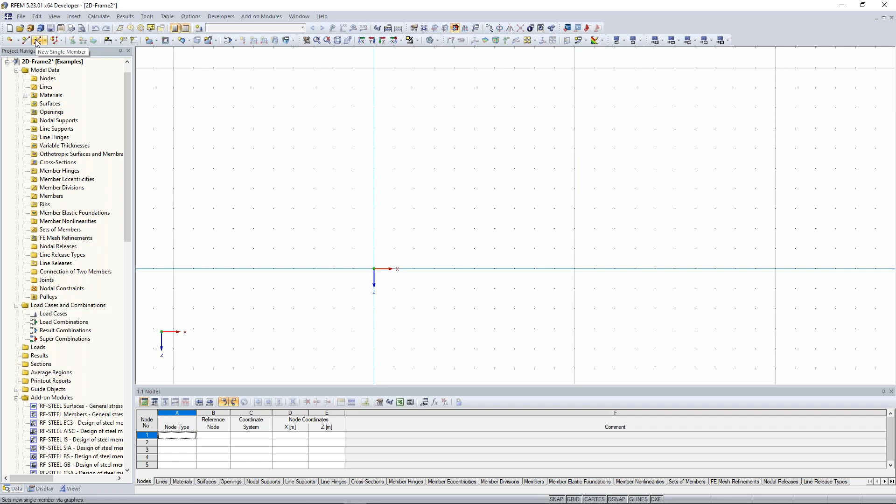First of all, I create my column. To create columns, you have to insert members, so I click here in the symbol bar, new single member. Because we haven't modeled or created a member yet, we have to create one. So I click here, create new cross-section for member start.

It's useful to use this most commonly used cross-section here in this window, and we have to choose the HEA profile. So in this case, this one. We click on that and choose here HEA profile 180. Yeah, we choose the right material - in this case, not S355, we want to have this as 235.

So I have to modify this material. The best way to do that, I think, is to modify it, because then it's modified and we can use it the whole time. So click here, edit material, open here the material library. Choose here Steel S 235. It doesn't have to be in the standard group German, it can also be in the Eurocode group - it has the same values, the same material properties, so it doesn't make a difference. So choose here Steel S 235.

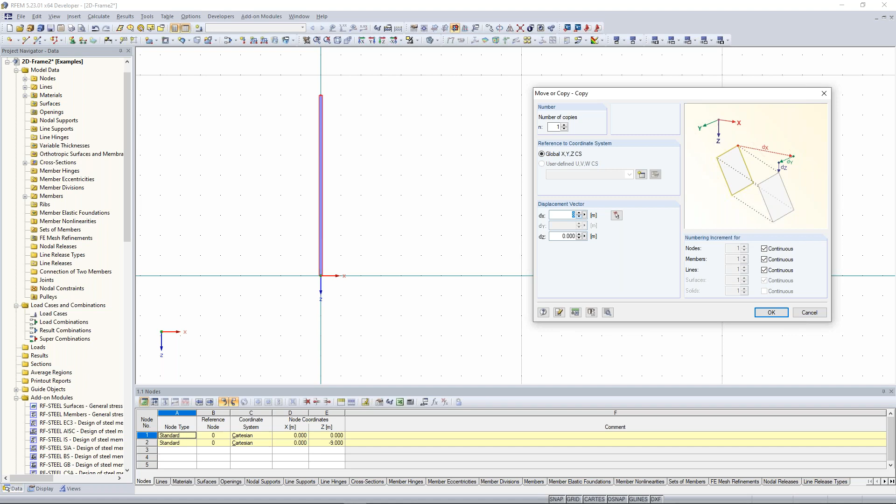Then right click, and now I want to show you the copy function. So I select this column here, right click, say move and copy, and set the number of copies to at least more than 1 in order to copy that. My displacement vector is 9 meters - no sorry, 8 meters, sorry, now it's right. Okay, now I have 2 columns here.

Now the next thing is to create the upper girder, the roof girder or roof beam. For that, I choose again new single member, and I create again a new profile, clicking here, creating new cross-section. For that we need an IPE 270 profile, so again here we have these IPE profiles.

If you don't find the wished profile here, just open the cross-section library, for example here, and RFEM offers you a lot of different cross-sections. When you want to find the I-profile, click here - the I sections, click here on rolled and so on. I can do it this way, but also the other way. Now I'm at this window, go here for IPE, and click here the IPE 270. If you want to see the different cross-section properties, the values, click here on the info button below cross-section, and now you see a lot of cross-section properties - shear area, cross-sectional area, moment of inertia, and so on.

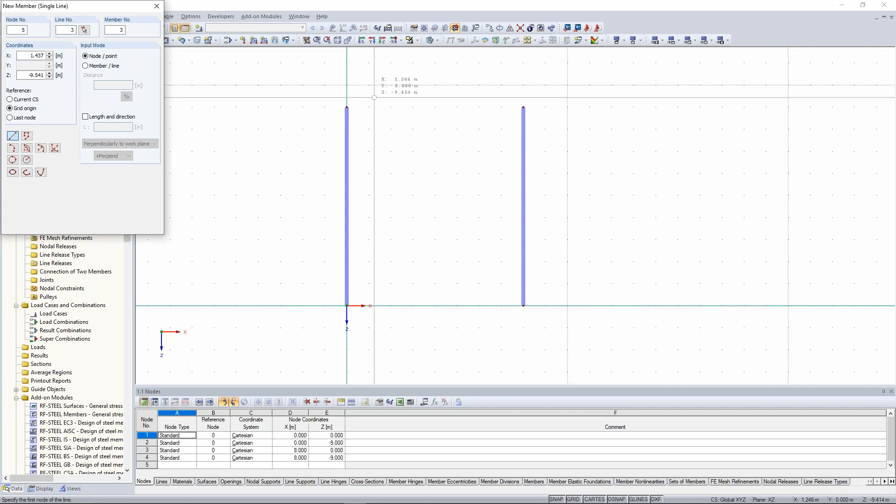Now, the next point is creating the slab beam here. We have also a slab beam or slab girder, with another profile. First of all, I want to create this cross section.

I told you in the first online training that we have also the possibility to create cross-section members and model data with the help of the data navigator, but also with the help of the tables.

Now I want to create the new cross-section with the help of the data navigator. So first of all, I choose the data navigator, go to the area of cross-section, open this tree there, and with a right click on cross-section, I say okay, new cross-section please.

And there I create a new cross-section. In this case, again, an IPE profile, but IPE 360. Okay, click on OK, click again on OK.

And now you see a new cross-section was added to the cross-section list, and it's blue. It has the color blue. What does it mean? When you have some model data here, especially which are blue, this means that they aren't used in the model right now.

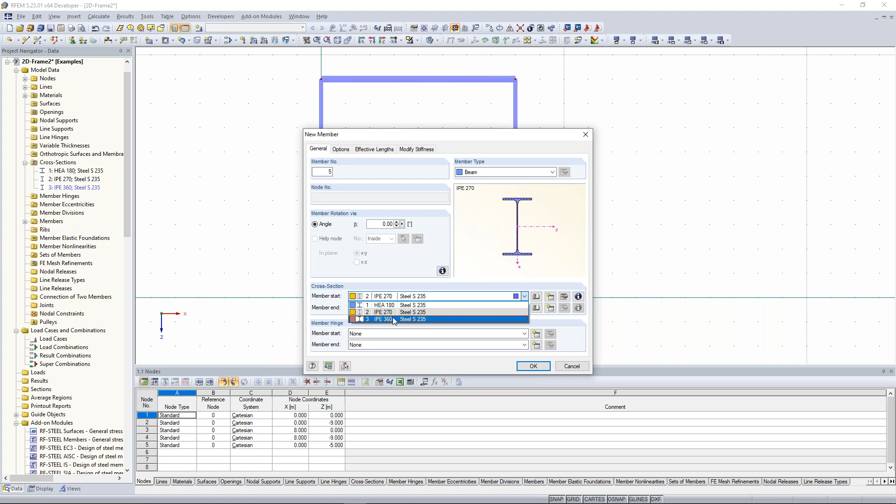I get here a new node. Now I can easily create a new single member, again by clicking here at the symbol bar, new single member, and choose now the right cross-section I've created before. Click here IPE 360 and create that from that side to the other side. Good.

Now we want to create again here a column. And for that, I divide this member again. Click here, member number 5, and say divide member. But at that time, we do it graphically. Big advantage at the graphically dividing is that you can not divide just this member we clicked before, but also any other member. This is one advantage of dividing members graphically.

Important thing is to choose the right steps, the delta steps. And now I go to this member here. It refers also to the member orientation. And here it's important that we divide this at the length of 4.5 meters.

So close this window. We have here this newly created node, and now we have here the same cross-section column. So I click here on that cross-section, on that column, and now I want to copy it by drag and drop.

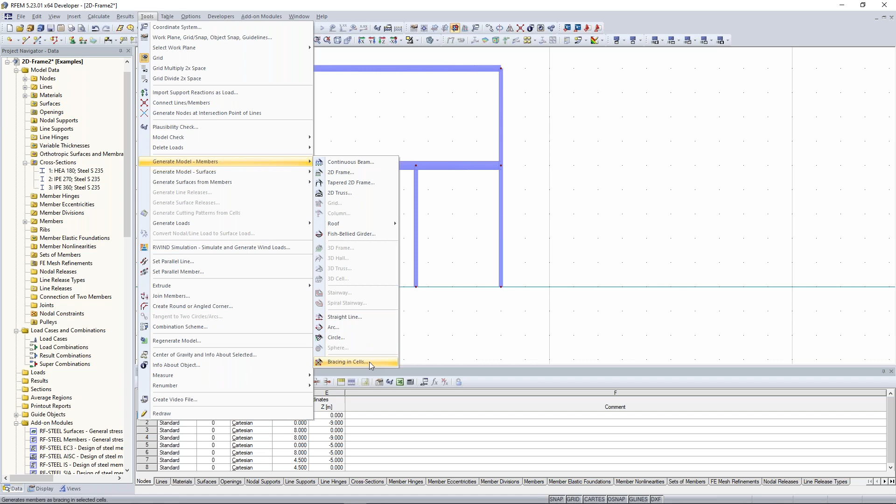But I decide to create a bracing in cells. I click on that. Now, first of all, the bracing normally reacts just on tension. So if this member gets tension forces, it will react and transfer also the loads. But if the member gets compression forces, it will fail and this member wouldn't be calculated, okay? And wouldn't have any impact on the structure.

So it's important to choose here the right member type, tension, and now also the right cross-section. I create a new cross-section. We have a round steel here. Click on that, round steel.

And choose the right diameter, 20 millimeters. Click on OK. Click again, OK, and now we have the right cross-section.

Now we want to create this cell, but normally you would see a cross there. The reason we don't see a cross is because this rectangular cell isn't closed by a member. So we can create virtual lines. I click here on virtual line, then click OK, and now you see the cross because we closed this cell. Now we click here, select cells, and I choose this cell. Click on OK, and the bracing is generated.

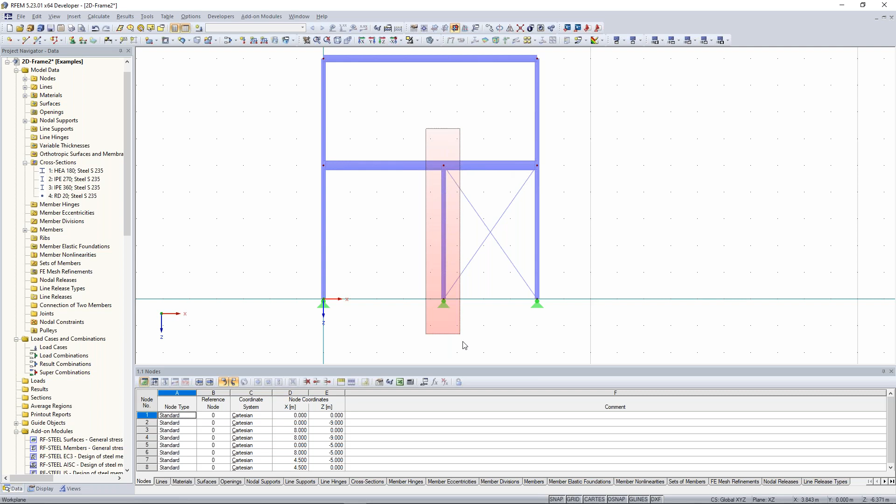And finally, we have to do our hinges, because here I want a hinged joint, and the same way here also a hinged joint, and that column should be also hinged. So I have to create hinges, and for creating hinges I refer also to my data navigator.

So I go again to the data navigator and say okay, member hinges. I click here with the right click, member hinges, and say new member hinge. Now this window opens, and let me explain what you have to do there.

If you want to create a moment hinge, so no moments will be transferred to the other member, you have to activate φY here, so the hinge. If you want to create shear hinges or normal force hinges, you have to activate the displacements here, UX and UZ.

So for that, we want to create a moment hinge, we have to activate φY here. You can also do it by clicking one of these shortcuts or icons, set rotational release MY, and it has the same impact. For that I choose φY, click on OK.

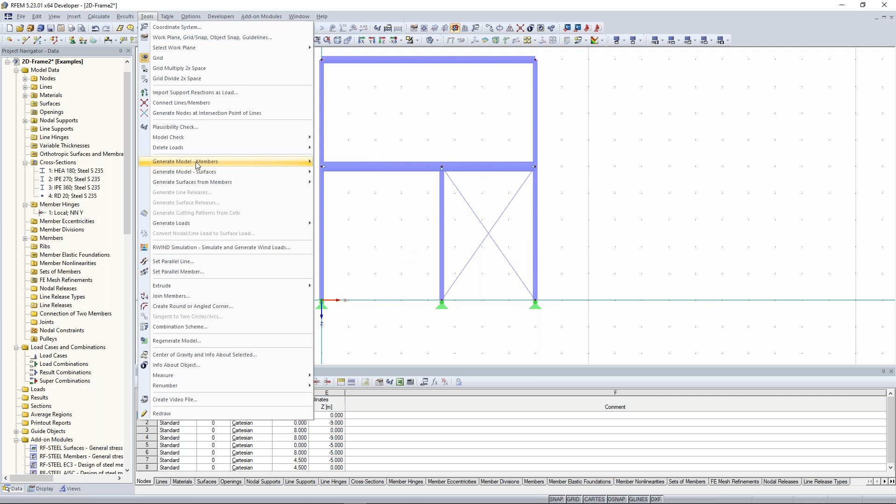I create the bracing again on the left side on that cell. So first of all, go here to Tools in the menu bar and say Generate Model Members. And at the bottom you find bracing in cells.

And the reason maybe why you couldn't create this is because you didn't set the virtual line here. So you see now where the crosses are, the group crosses. There it's possible to create a bracing.

But here on the left bottom cell, you don't see the cross, and this is also the reason why we couldn't create a cell there. In order to do that, we have to create a virtual line in order to close this rectangular by members, in order to get a cell.

I do it now as an example. So I click here, select virtual line. In order to close that, I click here from that node to that node, and then from that node to that node, I click OK.

And now the program sees, okay, this cell is closed, and I can create a bracing here because now I have a cross there. Now, the next thing is you have to select this cell, click here on the cross or the cell, and click on OK. And now the bracing was created.

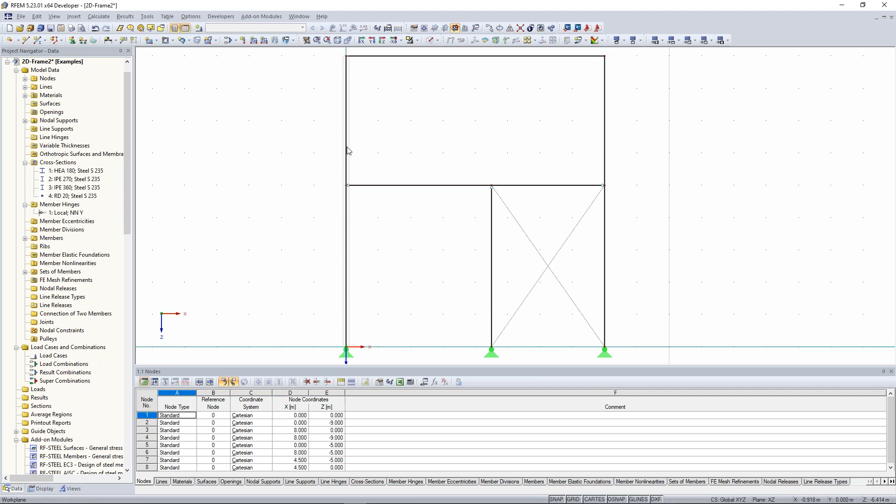Okay, so next point is the loading. So you add now some loads. In order to do that, we have to create a load case before. Click here on new load case at the symbol bar, and enter a name there. It's up to you; in my case, I choose self-weight. I activate the self-weight, click on OK.

Now I add some loads. Because we are using a frame structure and we have just members here, we have to use member loads, not line loads. Line loads please use at surfaces, so lines of surfaces or edges. And when you have frame structures, please use member loads.

I create now a new member load, and I refer to the projected member length. This is similar to the snow load when you have an inclined member, for example. But in this case it wouldn't make any difference because this line or member is straight. So there will be no difference whether you use the projected member length or the true member length. I choose here this one and enter a value of 12.767 kilonewton per meter. Click on OK, and I choose this girder here.

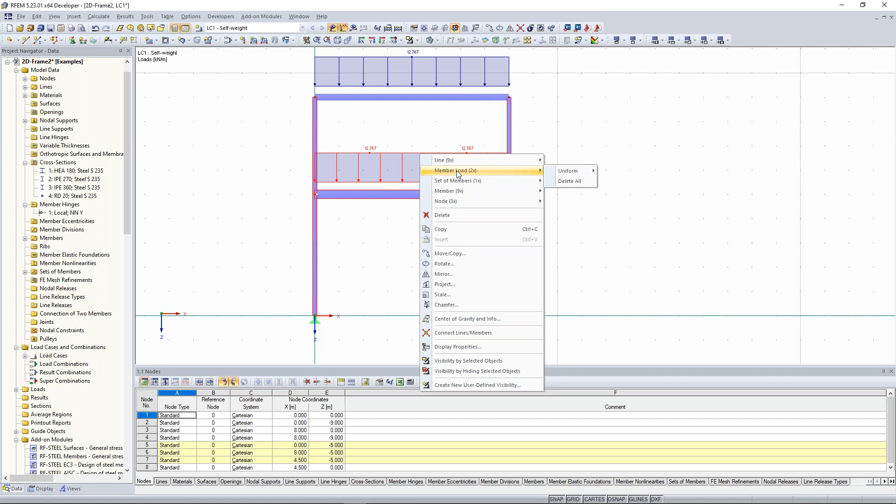Now I do the same for the slab beam here. Click again on these two members here, but they have the wrong value. So what can I do? I select this like that, and now you see I have selected not only these columns but also these bracings, nodes, and so on. But that makes no difference for us, because when I right click, I see the different selection options. This is one big advantage of RFEM, that you can choose these model data or load data and edit them. So in that case, I choose these member loads, uniform, and say edit.

And I change the value, so the load parameter, from 12 to 68.371. I click on OK, and you see I just changed this member load and nothing else.

Now I want to add some nodal forces. For that, I select these nodal forces at the top and say, okay, new nodal load. Because we selected these nodes before, you see here I have these nodes. Okay, I choose here a value of 40 kilonewton in the vertical direction, so I choose PZ, click on OK.

Now I can easily copy that nodal force also to the other floor, or to the other level. So I click, for example, here at that node, and by copying via drag and drop, I can easily copy that very fast. So there are several options to insert these nodal forces, nodal loads.

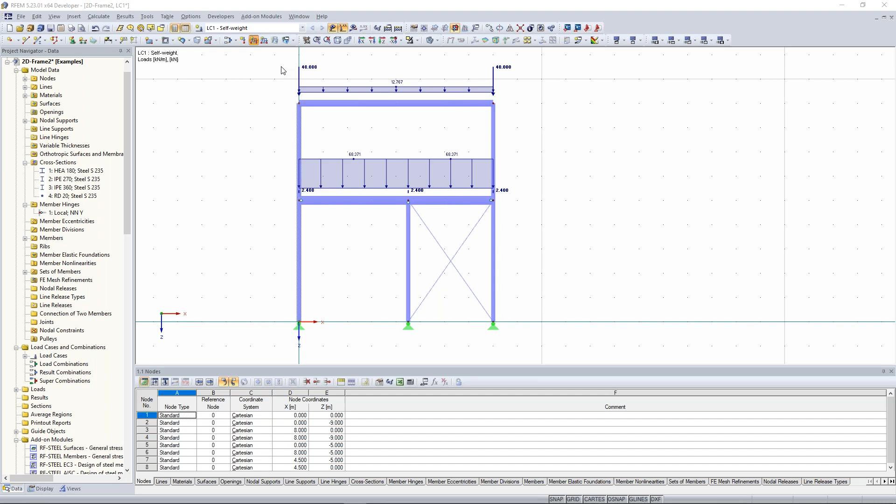And first I want to create this on the right side. So I refer to my members, choose here load parameter 2.7, and now also the right direction, in this case to the global X direction. Click on OK. And I choose here every member manually.

You can imagine if I have more members, it will be a lot of work. But if I use the set of members, it will be an easier workflow adding this load because we are much faster. Click here, sets of members, change the value to 4.32. Now, just by clicking one of this set of members, I created the whole load along this column. This is very helpful and useful because the set of members offers you more advantages, like adding loads, also when you design something.

And now we can also see this in the interpretation of internal forces, or in the view of internal forces. Okay, now we added everything and we can calculate it. So you can click here, calculate all, or click here, show results.

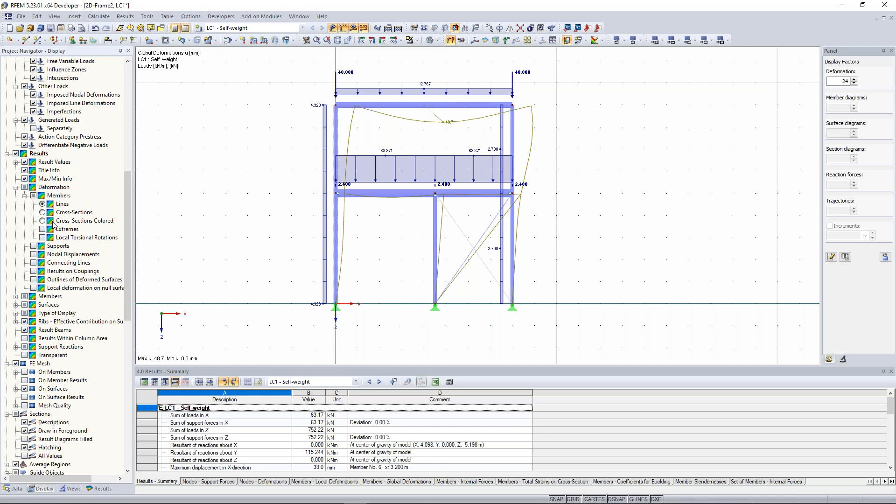And first of all, we see here the deformation. If we want to display the deformation a little bit in a nicer way, go to the display navigator, go down to results, and to the area of deformation, members, and choose that the cross section should have a colored deformation, and you see it like here. You can deactivate maybe also the isobands, the separation lines, and now it would look a little bit nicer. Yeah, this is one tip.

One of my secrets in order to show that a little bit nicer. And then let's go to the internal forces. So for that, we have to activate the members here. Okay, what I want to show you first is the bending moments. I think that's pretty clear because there we have a hinged joint, so there shouldn't be any bending moment.

When we look at the normal forces, I think that's also pretty clear in the columns that we have some normal forces. And now look at the bracing here. Why don't we see any normal force at this bracing, at this member?

Because when we look back to the deformation, we see, okay, this deformation is set to the global X direction, so we have horizontal deformation. This bracing, this member, becomes longer. So I think that's pretty clear that this will get tension forces, and this member will get compression forces because it becomes shorter.

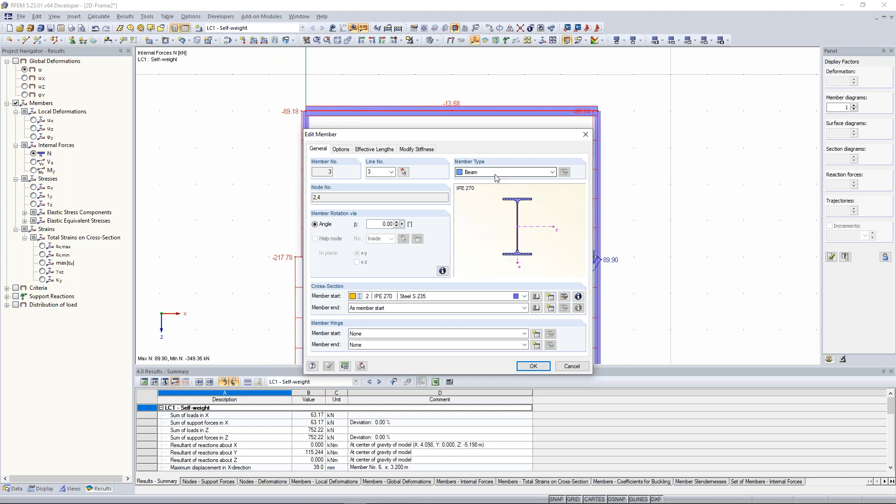Okay, now again, one important point is the connections of the member type. So if I double click on one of the members, we have here different member types. This member type, beam, is the standard member type for creating these structures. This is a type where you can transfer all internal forces, so you have normal forces, shear forces, and also bending moments. So it's a bending resistant beam.

When you have trusses, for example, a truss is a beam, and at that beam you have hinges at both ends. So at the ends of this truss, you wouldn't have any bending moments. And the same with tension and compression member types and so on. You have a big choice of these member types, but the most important are the beam, truss, and also tension and compression. Okay, good. Later we'll come back also to the ribs, but that's another story.

Okay, good. And now I want to show you also the view of the internal forces at a set of members, because this is also more advantageous to do. So I deactivate that, I change to my wireframe model.

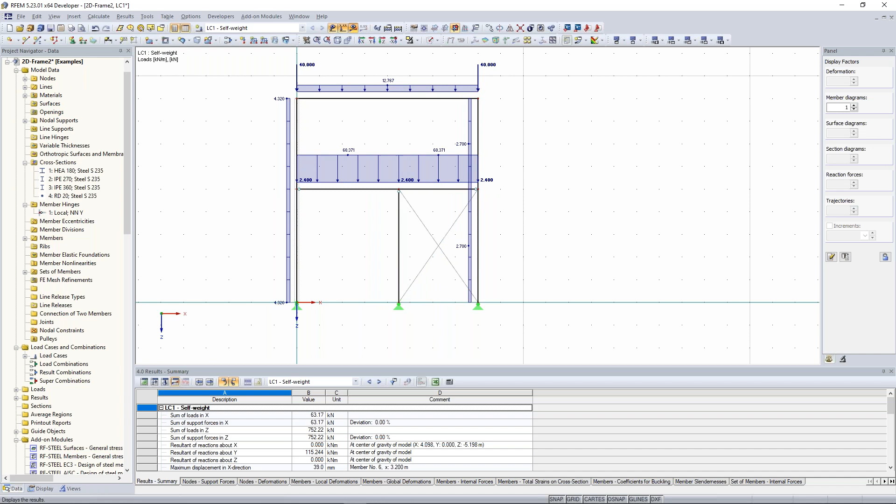Okay, I can show you the difference. First of all, I show you with the help of the cables. I think that's the best way to do that.

So look, the bracing has the member type tension, but you have also the possibility to have truss and truss only normal forces. A truss can have along his member bending moments, but only at the end there are no bending moments.

So when you look, I create here a rigid joint, so I delete this member end, but I create here a single beam with hinge joints. So in order to create that, I create here at the member end again a hinge, and now it's a single beam. You have no bending moments there. You will see it now, just for this member.

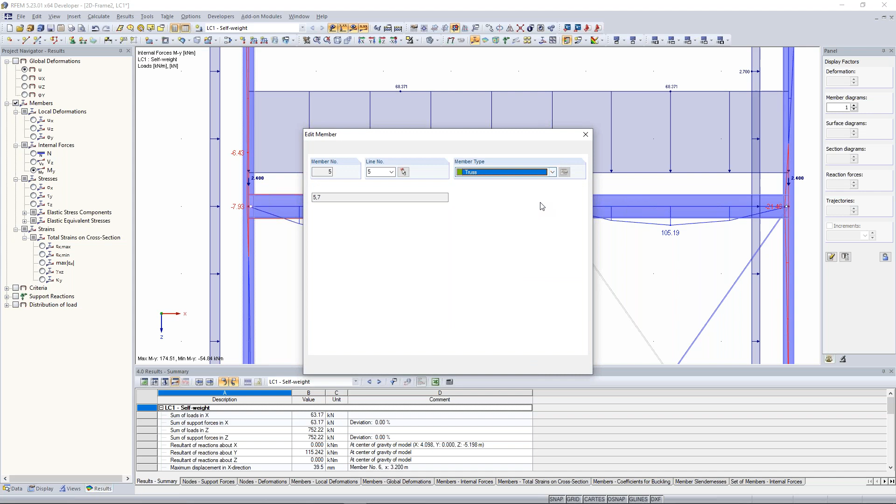Look to the bending moments, and I think that field moment is very clear. At both ends we have hinges, and that's also the reason why we get no negative bending moments. And the same situation you can create also with the member type truss. With the member type truss, the adding of member hinges is blocked, because at both ends you have hinges. Now look to the internal forces of the bending moments. Same situation, same effect, I think that's also clear.

And now I want to show you with the truss. So for that, I choose here these two bracings, say edit, and truss only normal forces.

Now I think the better way to show you is when I activate this at the columns. Look to the bending moments, and when you look to the columns, you see there are some bending moments. And when you don't want to have that, when you want to just transfer normal forces, only normal forces, click on that member, on that column, and set truss only normal forces.

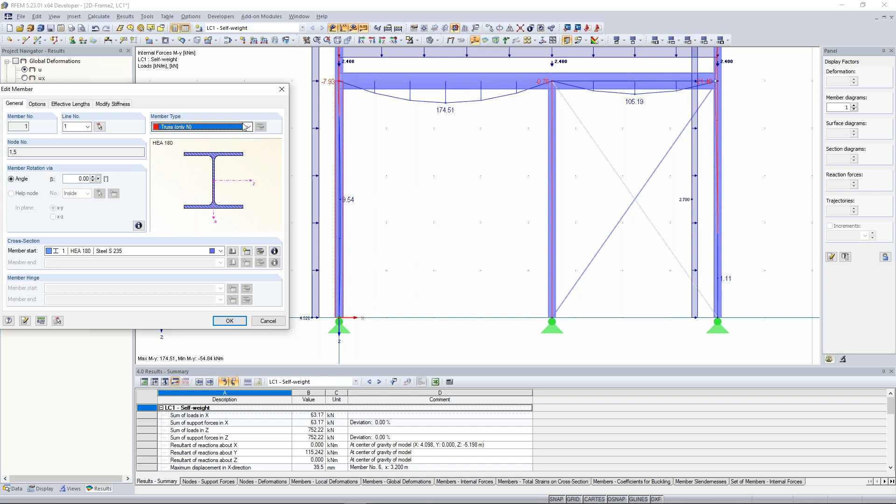So the program will calculate that column so it will get just normal forces. But these forces can be positive and negative, so you can get compression or tension forces, but nothing else, just normal forces, positive or negative. I calculate it, and you see no bending moments. At the calculation before we had some bending moments, but now there are none, just or only normal forces. And this is a difference concerning these member types.

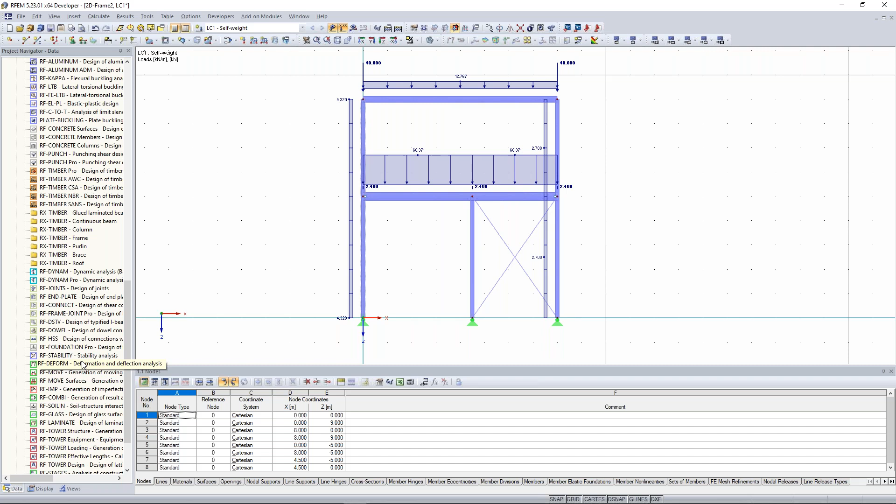So for that, I click here at RF-Stability. I consider 4 eigenvalues, so 4 buckling cases. I refer to my self-weight load case. I just have to activate my division for straight members at least at 10, so the minimum number of member divisions should be 10. It's up to you, but more than 2 definitely. And the other settings, you can leave as they are. Calculate it.

And now you see the critical load factors, the factor where you have to multiply the whole forces, the whole loading, in order to get an instability. But we want to show the eigenvectors, and here we see it.

Normally the first eigenvector should be there, but I can say why this eigenvector is like that: because there isn't a column, this is a rigid joint here since we have no hinge. I change this now, I make here a hinge, and now keep that eigenvector as first buckling case in mind. I create here, wait a moment, here a hinge, and calculate everything again.

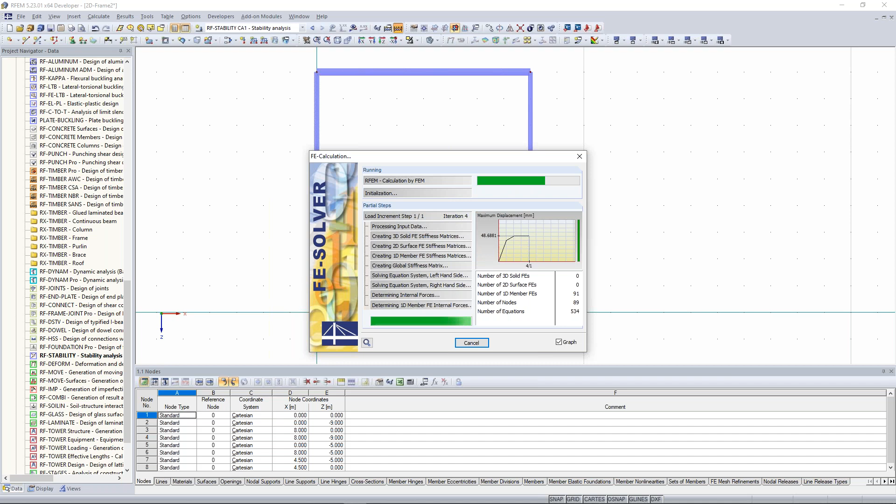And now it's better. So the first buckling case here is this column. We have here the second Euler case. And this is a local buckling case or a local failing, because this column will fail at the eigenvector, or critical load factor, of 5.81. And then the second will be a global failing.

And to look at the buckling lengths, or critical lengths, effective lengths, click here. And here you see the critical lengths of this.

When we look to the member number 8, there should we have a member length of the same length like this one. Look here, member number 8. We have here for the first eigenvector the effective length factor 1, and this is also similar to the Euler case 2, and this length will multiply by the normal length here, and we get a value of 5.7 meters. This is the effective length, so the buckling length.

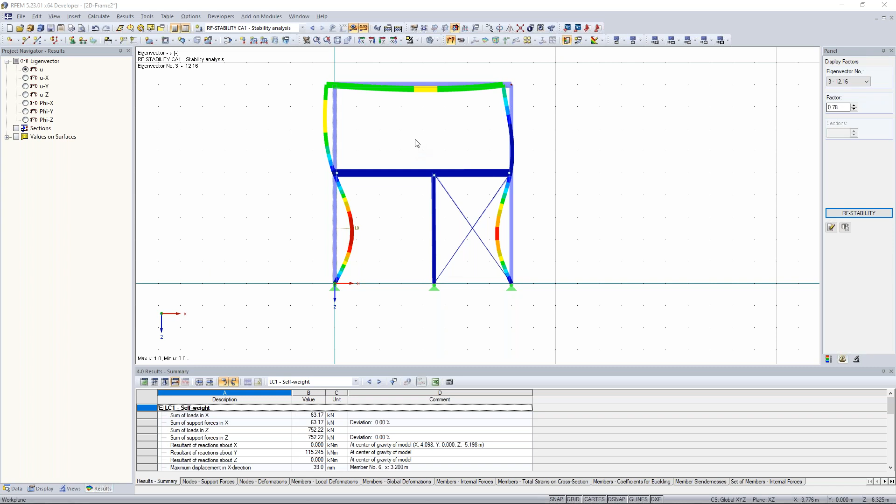So as far as I understand, this question is about the design practically. I think so too. So you want to prove if this cross-section is enough for the whole loading.

In order to do that, you have to do some designs, and we can do a simple design, for example. We make a very easy design, a stress design at that beam. Look at the results, the bending moments. So we have here the normal forces, this bending moment, and so on. Now look to that.

We make a very easy design. For that, you have to use one of our add-on modules, and there you can refer to several design options. For example, when you want to design it according to the Eurocode, please use this RF Steel Eurocode 3. When you are from somewhere else and use different standards, please refer to the wished standard here.

But for that, I make a very linear elastic proof. So I go here, RF Steel Members. This is a general stress analysis of steel members. I refer to that member here, click on OK, choose this load case here. Now I can check the right material and the cross section.

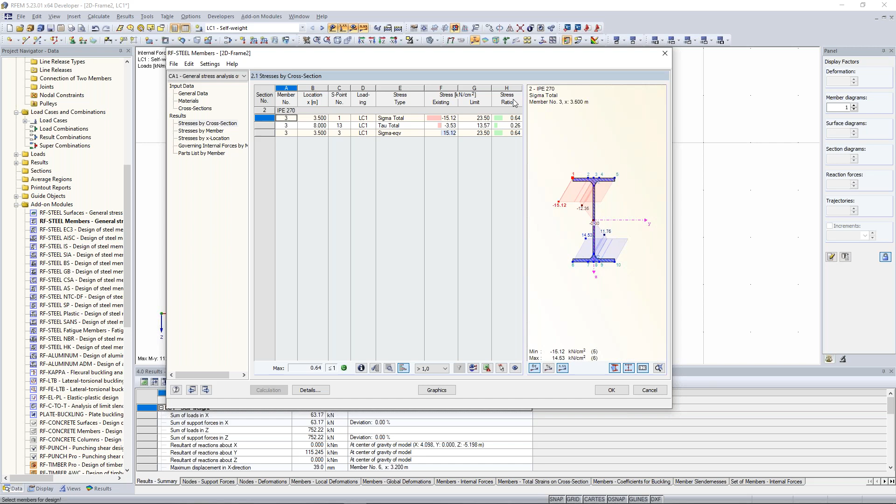And here you have the possibility, after the calculation, also to optimize the cross section. I have here this cross section IPE 270. I calculate it, and you will see the stress ratio is okay. So we have a value here of 0.64, and that's okay. So I can go back, say the maximum design ratio is 0.64, and I can optimize it.

So the cross section will be optimized, therefore the optimal section from the table will be used. So we can get a smaller IPE profile. Click again on calculation. Now we have another stress ratio, much more than before, because it refers to the optimized cross section, and in this case it's the IPE 240 profile.

And this is maybe a way to optimize or to get the right cross section for that case. Okay.

Another question, maybe the last question of this chapter: What are null members? Null elements, sorry, null elements. These null elements are members without any rigidity, so without any stiffness.

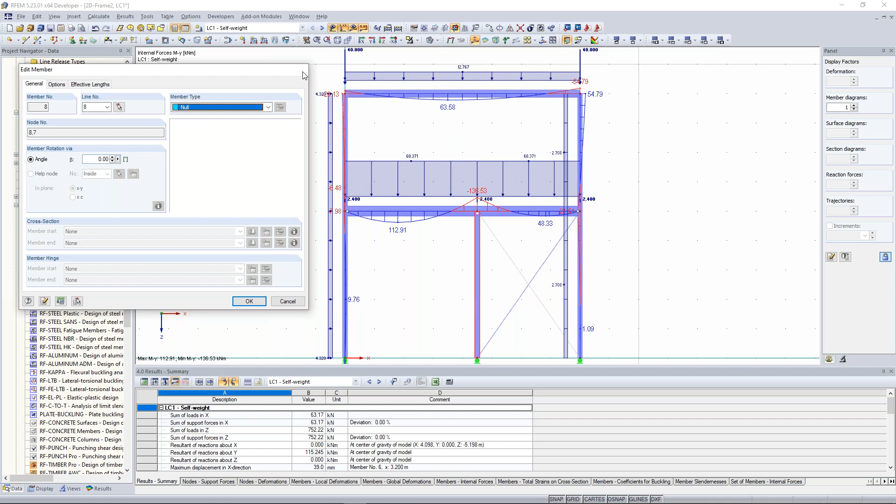So for example, I can create here this null type here. This beam will look like that. And then I would, for example, have a closed cell. This is maybe one option. Or when you want to add a surface load on members and you want to cover the whole rectangle, you can use these null members.

So the null members are maybe one way to model something, but you don't want to have any impact on the structure. So these member types don't have any stiffness and so on, just for easier modeling.

Okay, fine. Thank you. So I prepared some questions for you that will cover this chapter. For that, first of all, this question.

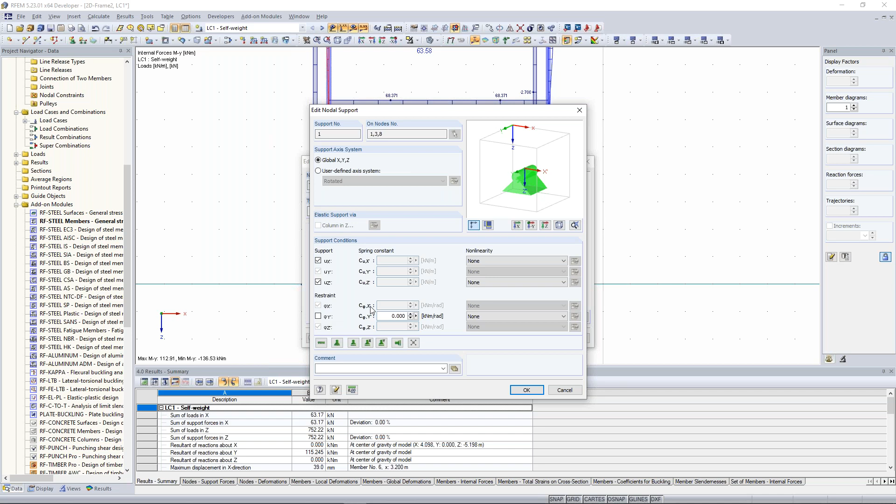I can show it here again. So I click here on one of these supports. When I added this type of nodal support, you see here some displacement and some resistance. So here the supports and the restraints are greyed out, and that's because we are using this 2D system, and some deformations and rotations are partially blocked. Good.

So the last question of this chapter is this one.

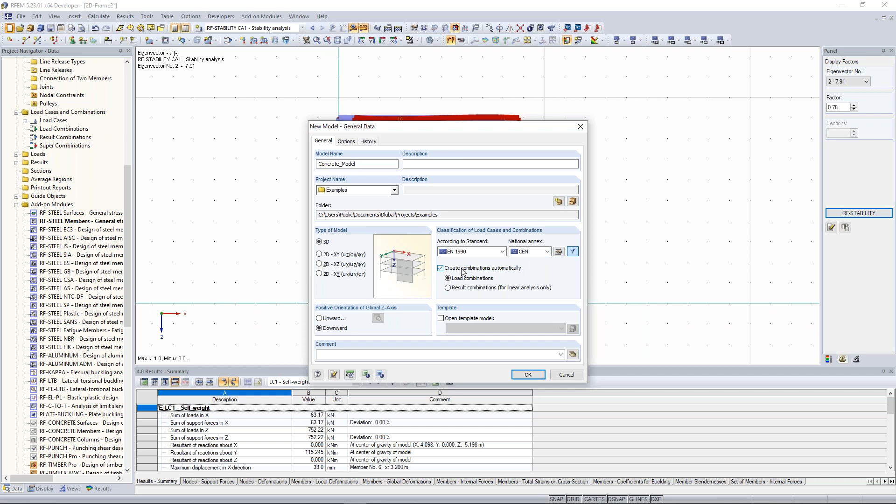My z-axis is oriented downwards, and now it's very important that we choose here the Eurocode and select the right national annex. For that, it's okay when we have here the CEN, the Central Europe, and create the combinations automatically. We click on OK. And a new window will open.

In order to insert the nodes very easily, I would recommend you now to use the tables, okay? So I jump back to the view in the Z direction in order to have my window like that.

And now I insert several nodes via the tables. It's very easy when you have the coordinates in order to do that. Just click here at nodes, click on one cell, refer to the origin point, then jump from one cell to the other with the tab key on your keyboard, and enter here for X for the first node: 0, 0, 0.

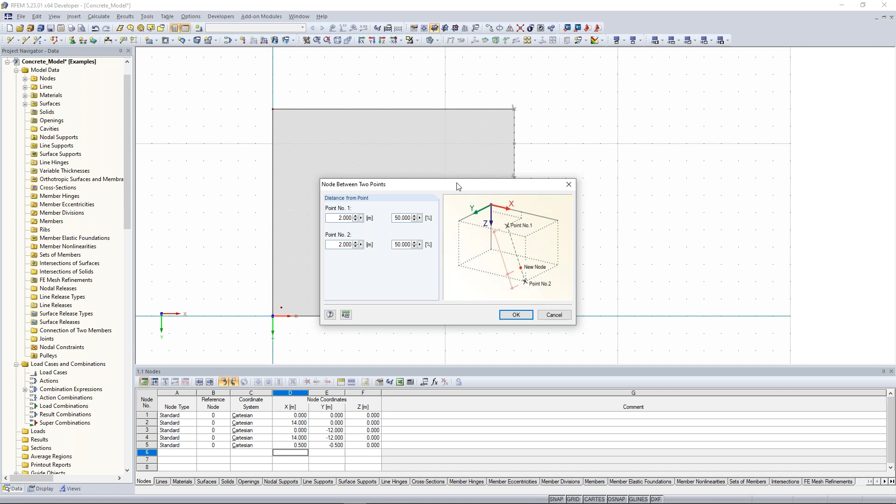Now go from the upper right corner node, click on that, and go 4 meters downwards: 1, 2, 3, 4. Now you can say at which distance the new node should be generated - exactly at the half, because I want to have it here. And you see, here I have now a new node.

Now the next step is creating this semicircular surface. Go to the new rectangular surface, click on the arrow, and you have a choice of several forms of surfaces. Here choose semicircle, choose the right thickness, click OK, click on the radius, and go 2 meters down. Voila, we have this semicircular surface.

For the next things we need to copy this node several times along this axis, and also copy it a little bit upwards. Click on that node, right click on move and copy, and say here the number of copies should be 2 with a displacement vector of 5. Click OK.

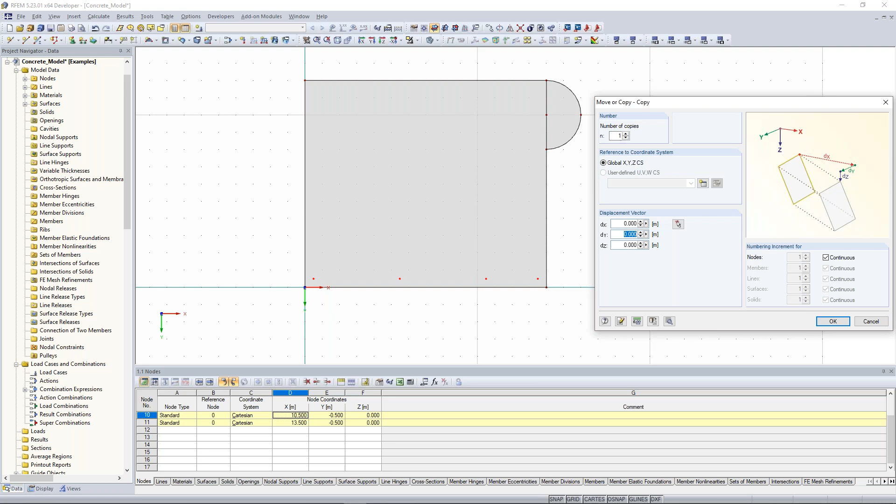Right click, say move and copy again. In this case also the number of copies should be 1, and this displacement vector is minus 4.5.

Okay, now you select the third node from the left side. Again, move and copy, and there it should be 4 meters, minus 4.

Now we want to copy everything to the next level. So we draw a selection window over the whole structure, right click, say move and copy. Now the number of copies should be 1, and against the positive Z direction, because we want to copy it to the next level, click here and enter the value of minus 3.25 meters.

Now rotate your window with the help of the control key on your keyboard and your mouse wheel a little bit, and you have it like that.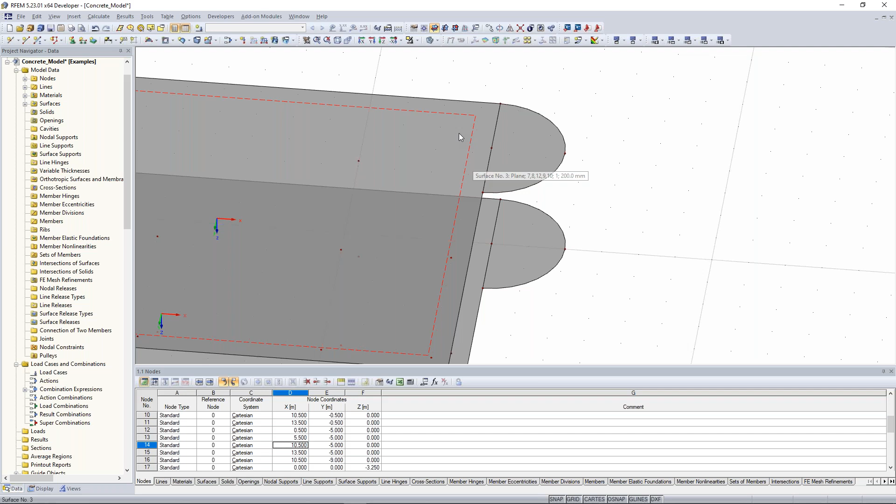Keep in mind that creating the opening over two surfaces is not possible, so you can just create openings in one surface. For that, we have to delete these two surfaces. Click here on that line, click delete on your keyboard, or right click delete line, and the whole surface disappears.

But in order to create now one surface at once, we have the possibility again to create a surface with the help of the boundary lines. Select boundary lines, now set the thickness to 300 millimeters, and click on one of these lines, and the concrete slab is generated.

Okay, good. Now we can create this opening very easily. Next to the creation or inserting of surfaces, you find the openings. Click here with the help of the arrow to circle, click here to the middle point, and enter a value of the radius of 1.8 meters. Click on apply, and then you have this opening here.

Okay, good. The next step is creating the walls. The walls are also surfaces, and you can create a surface when you have at least 3 boundary lines. So how can I do that?

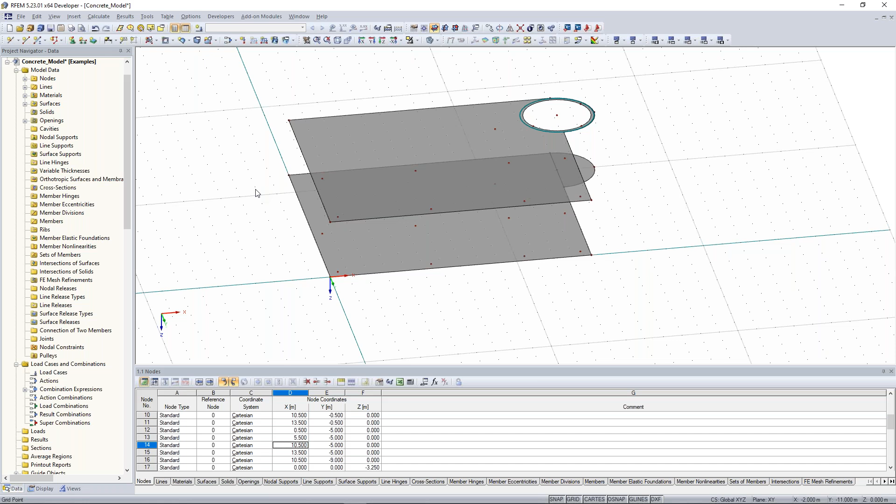For that, I want to create here some walls, and also here the semicircular surface. I need additional nodes and additional lines. So how can I do that? First of all, I divide my lines in order to get new nodes. And with the new created nodes, I can create new lines.

I click on one of the lines, in this case on the line on the left side. Make a right click and say divide line, in this case by distance. Now I look at my line orientation, and in this case it shows me from top to bottom. So I say I want to have it at a length of 3.5 meters, so the line start should be 3.5 meters. I click on OK.

And this node was generated. I do the same thing for the other lines. I click here on that line, right click on divide line, say also by distance. Now I refer to the line end, and here I enter the value of 5.5. Click on OK.

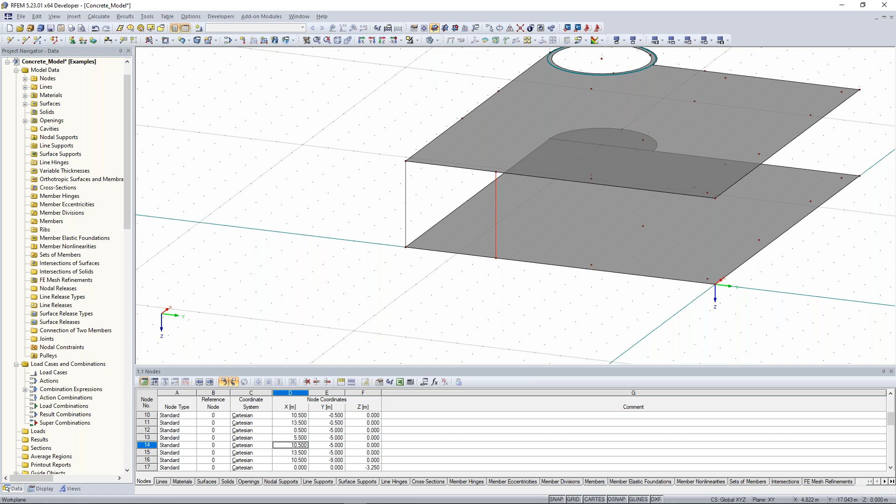Now watch out, this is maybe one of the most useful functions in RFEM: copying via drag and drop. I click on that line, press the Control key on my keyboard, and move this line from there to that node. I do the same thing for the other nodes. These will be my boundary lines later for the generation and modeling of my walls.

Okay, good. Now I can create the walls. To do that, go to the creation of rectangles, select boundary lines, enter the value for the walls of 200 millimeters, and click these boundary lines. I think that's pretty clear.

The reason why I don't do any wall there is that at curved lines, plane surfaces aren't possible to create. So for that, you have to use another way to create a surface, because what we were doing until now was creating plane surfaces, and that's everything possible with that. But now you see here we have a semicircular surface, a curved line. For that we have to use something different, the quadrangle.

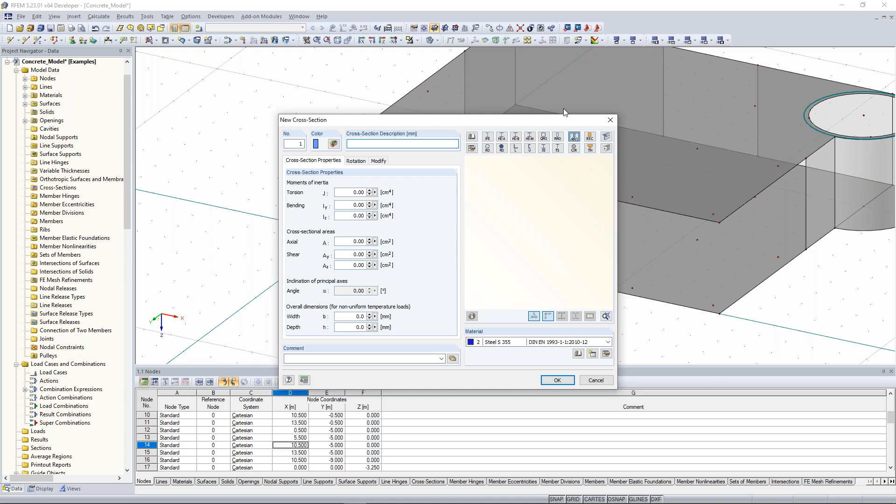Decide here for this rectangle concrete cross-section, and we have a quadratic cross-section of 350 to 350 millimeters. Click on OK, and because we were referring to this concrete cross-section, the material was also set to concrete C30/37. Click on OK again, and draw this member from the lower node to the upper node, and with a right click, close this insert window.

Now I want to show you again something very nice, again the copy function via drag and drop. Select this member here, press the Control key, and move it from one node to the other node. I think that's pretty clear.

Now rotate your window so that you can select all 4 columns by drawing the selection window from the right to the left side.

And now all columns were selected. Press the Control key again, and you can copy it easily to the next node, to the next plane here.

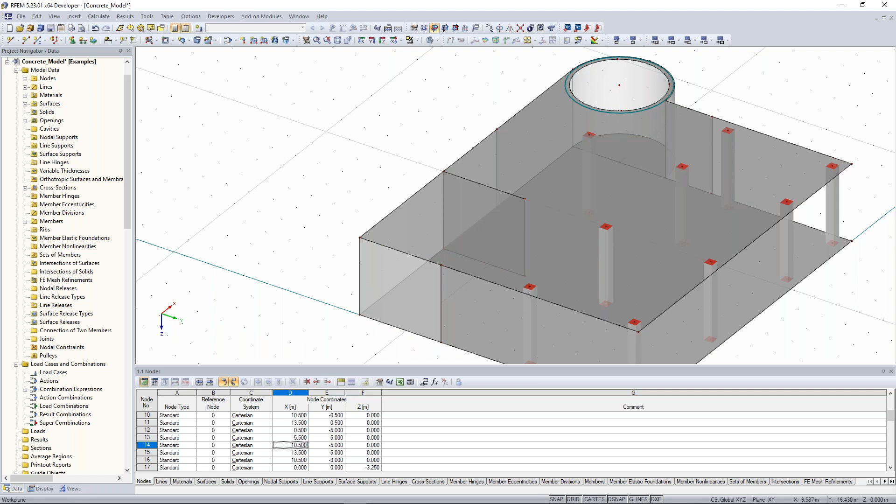We got the question, as always, if you could show the opening again. Okay, of course, that's no problem. So I delete this opening. I delete also this line here. And as I said before, in order to create an opening, you have to do that at one surface. Before we had 2 surfaces, so I created here the whole surface.

Now go to the symbol bar, click here on New Circular Opening. You find it here when you click on the arrow. Click here, Circle, and click on the middle point. Now you have the possibility to do it graphically, but because you are working with the wrong work plane, it will not be so easy to do that. So just enter the value of 1.8 meters, click Enter, and the opening was created.

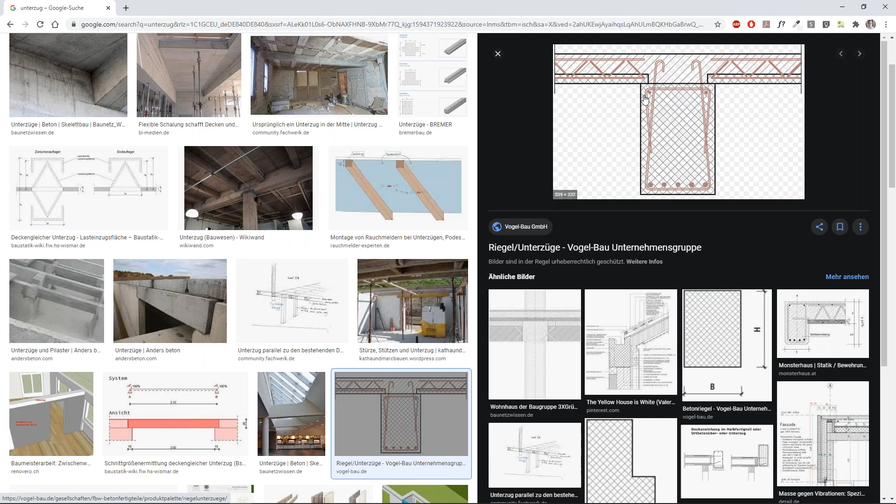And I want to create this now with you in RFEM. Okay, good. In order to do that, we have to create a new line because, please keep that in mind, in RFEM, every member has a line and every line can have a member. Yeah, so every member consists also of a line.

And that's also the reason why when you choose this line and click on edit, at the member tab, there is every time a member available. So keep that in mind: every line can have a member and every member has a line in RFEM. For that, we create here a new line in order to create our downstand beam. So I click here on new line, click from that node to that node and again to the column here.

And you see, okay, we have a displacement vector of -5 in delta x and then also in delta y. But delta x, we don't want to have this, just delta y. Click on OK. Yeah, and now I made the mistake that I copied it and not moved it.

So I undo that by clicking Control and Z. Do that again. Move and copy and set the number of copies to 0. And now I have it right. Okay, good, sorry for that. But maybe it was a nice option or a way to show you how you can change something afterwards.

Yeah, good. Next thing is to create the downstand beam. For that, select this line, add to your selection also the next line with the help of the pressed Control key. Right click, say edit line. You see now here the line numbers we selected, and say okay, go to the member tab and say member should be available. Now we create a new cross section, so the cross section of the downstand beam. For that, we create a new cross section.

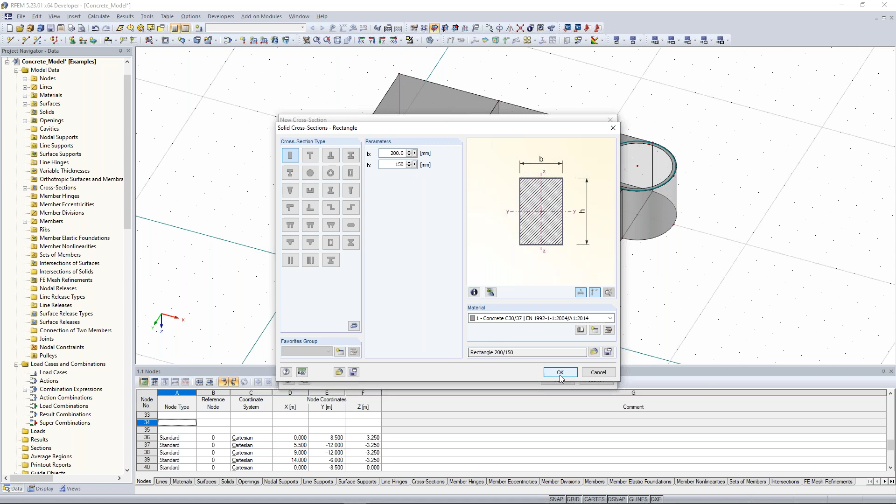Click here on rectangle. We have a width of 200 millimeters and a height of 150 millimeters. Click on OK. Yeah, looks like that. Click on OK.

Now, one of the most important things: when creating downstand beams or T-beams, please really use the member type Rib. If you learn just one thing from this training, it should be that you use the member type Rib for downstand beams. Go there, edit this member type.

A new window appears, and now it becomes very important. What is a rib? A rib is a member with integration widths. With the help of the integration widths, you get internal forces not only from this member, but also from the surface.

First of all, we set the alignment on the positive side of the surface, so it looks like that, giving us a real T-beam. The upper edge of this beam should be the lower edge of this surface.

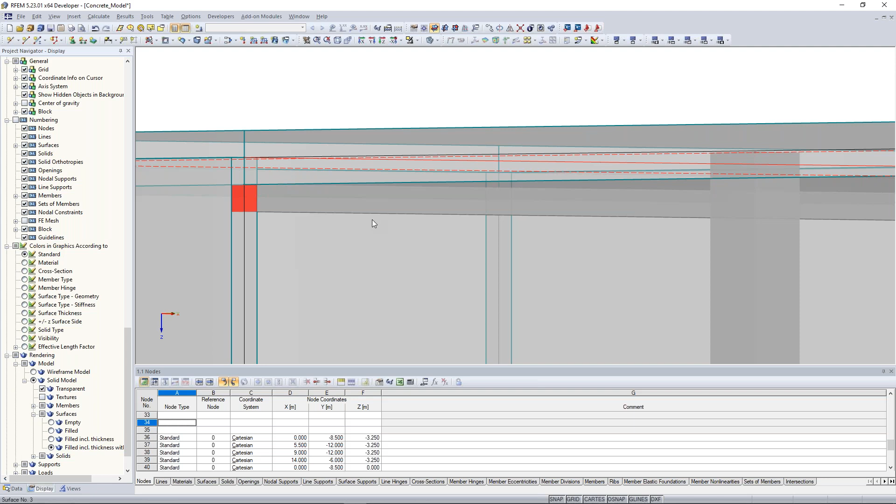I just want to show you: go to the display navigator, go to rendering, click on model, solid model, surfaces, and say filled, inclusive with edges. You see here that the lower edge of the surface equals the upper edge of this downstand beam. So everything is right, it's also realistic. This is one important thing to know when you create downstand beams.

Next thing is the creation of an opening at another work plane. I want to create an opening at this surface, at this wall, because we want to create a window. You have to change your work plane, because it isn't so easy to create an opening there since you don't have the right work plane to refer to, so you have to change your origin.

In order to do that, click here on Set Origin of Grid Work Plane. Click on that and choose this corner node, because then we are in the right work plane. We can change the work plane to XZ, so go here and say work plane XZ. Now it's easier to create a window or an opening there.

So for that, you can refer here to rectangle, and now it's easier to create different openings. But you see the snapping points, the grid points, aren't so easy to snap, and they are not at the right coordinates.

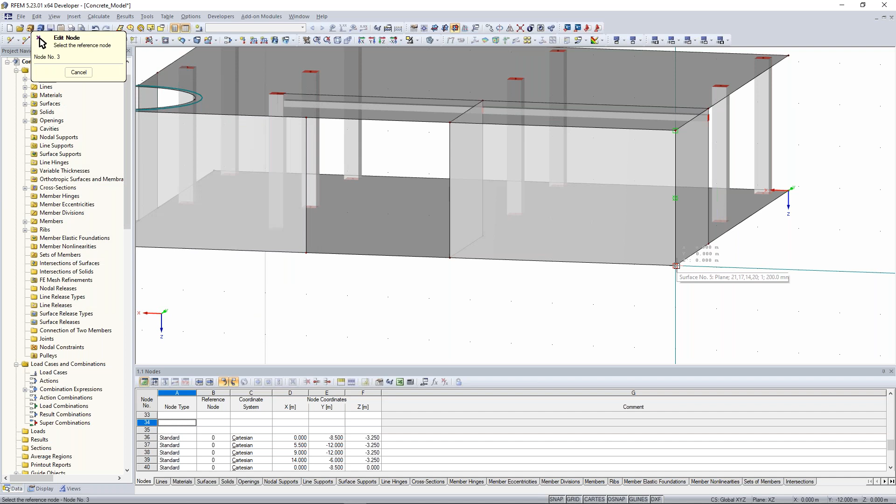So for that, I create my nodes. I go here, click on data, click on nodes, say create new node. Now it's important that I refer to that point. Sorry, this was the wrong insert of nodes.

I think the best way to do that is go to the symbol bar, click on new node, and refer to the Cartesian coordinate system, because this is now referred to the new origin we set before. Enter the values: 5, 0, minus 2.5, with the reference to the grid origin, and you see the new node. Create a new node again, in this case 1.5, 0, and minus 1.

Now you can easily create this opening. Click here on new rectangular opening, click on those two nodes, and you can easily create your window or opening. This is one point to keep in mind: when you want to modify, edit, or create something on another plane, you have to change your origin of grid and work plane. I'll change it back to my beginning situation.

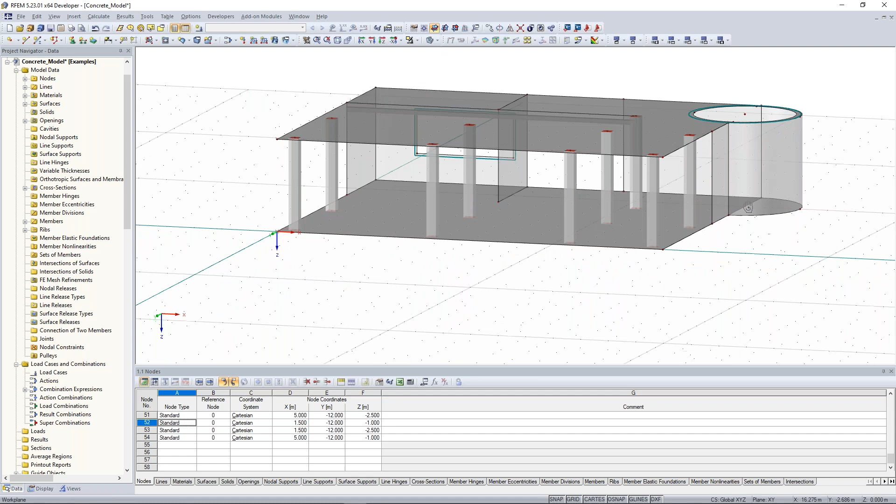I now create my surface supports, because we need surface supports to hold this complete structure, and also line supports to hold these lines, since there we want to have a continuous foundation.

First, the line support. I choose the wished lines and select new line support. We create a new line support, and since we just want to transfer vertical loads, we activate just the UZ displacement, which is blocked. Click OK, then OK again.

Now the surface supports. I rotate my window a little to select these surfaces. I click on one surface, press Control, and add this other surface to my selection. With a right click on the surface I can say edit surface.

Go to the tab support and eccentricity, and say the support should be available. There we change the units and decimal places, because we are referring to meganewton per meter to the power of 3. So click on units and decimal places, and enter for support stiffness orthotropy the forces in meganewton. Click OK, and these units will change.

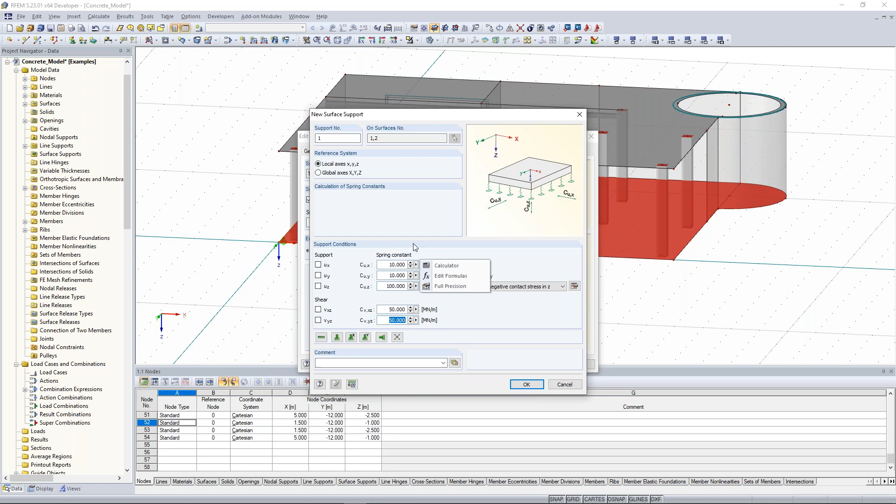In reality, when you design or model these kinds of foundations, please always consider some spring constants, don't make it rigid. This would have a very bad impact on your calculation and you will get no good results, because in reality you also have no rigid foundation - you have spring constants. Please keep in mind to enter some values there. I click OK, then OK again, and we have created this support.

Okay, good. The next thing is inserting the definition of load cases. We have several load cases to consider, so click here on new load case. Now you see several tabs, more than in the other project, because we activated in the general data the automatic generation of load combinations.

First, we create the load case self-weight. We leave it like that and activate the self-weight, so the program calculates the self-weight with the help of the geometry and the own weight, the specific weight, of the material.

Then we create a new load case: imposed load, referring to the action category shopping areas. Then we create another new load case for wind in the positive X direction, and again wind in the positive Y direction. We do the same with imperfection, once in the X direction and the other towards the positive Y direction. Good, all load cases are defined.

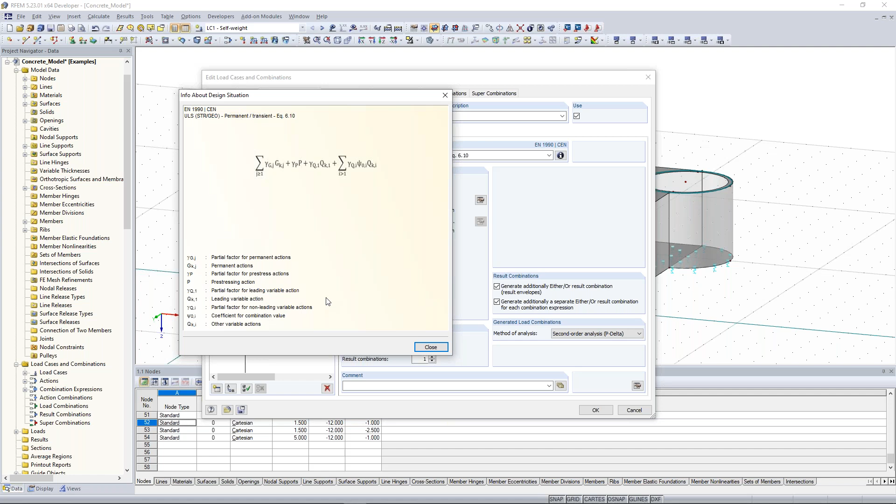Okay, I close this window. What I want to consider is the imperfection load cases. I have here these imperfection load cases, and I want just that they are considered with the right wind load cases. For that, I say all imperfection load cases as alternative, so no imperfection would combine with each other - they exclude each other. But I subject to specific load cases...

I don't want to have the imperfection towards the positive x direction combined with the wind in the positive y direction, because this would be a little bit favorable for the whole calculation. I know the most unfavorable situation will be if the imperfection towards the positive x direction is combined also with the wind in the positive x direction. So I exclude them.

The same I do for the positive x direction when I have the load case imperfection towards positive y. Okay, I close this and jump to the next tab, the action combination.

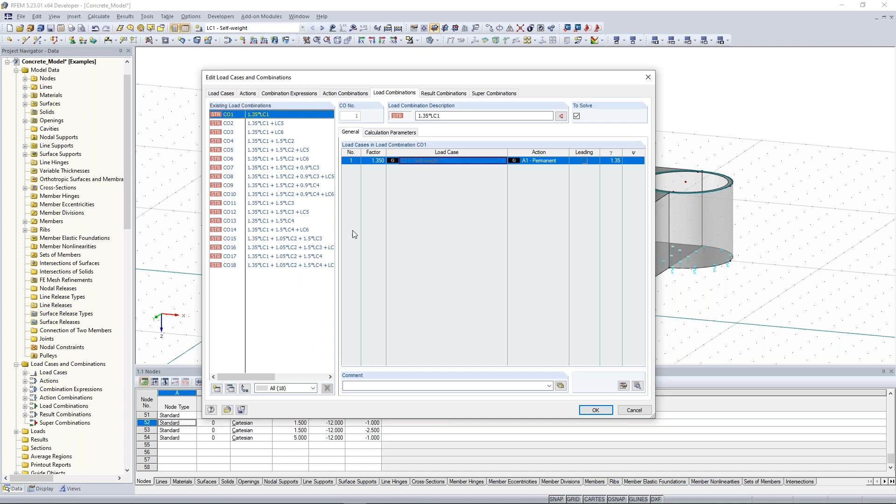This is maybe one big advantage, because there you have 18 different load combinations and you want to see the most unfavorable results. The result combinations are very useful because they consider all load combinations and all results of the load combinations in that case, and there you can see the maximum and minimum of the results. Okay, good - so much for load cases, load combinations, and result combinations.

Now let's make the loadings and then we can calculate the whole structure. For that, first I jump to the load case imposed load, because at the load case self-weight we don't have any loads.

Let's begin with load case 2, imposed loads. For that I go here, create new surface load, relate to the true area, and the magnitude of the surface at the bottom is 5 kilonewton per square meter. I click OK.

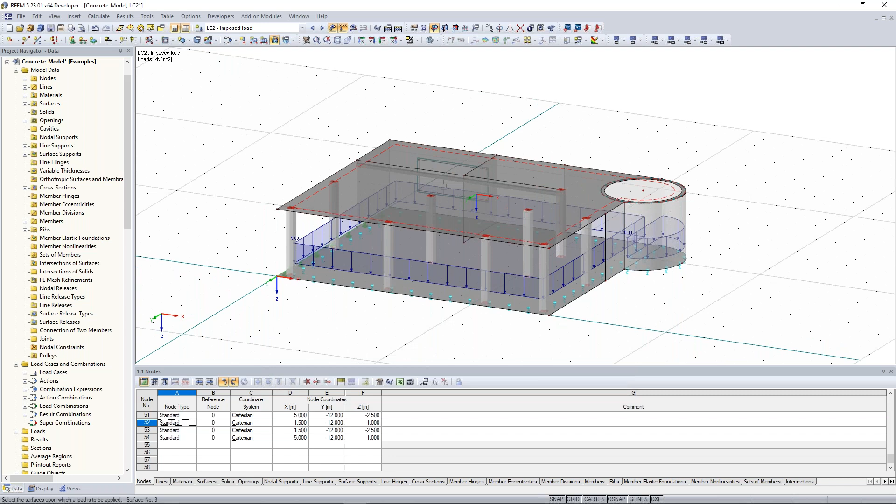I made a mistake, unfortunately. I click this surface here, rotate my work window a little bit in order to click on that surface, and do the same for the upper surface, but here I have to change the value from 5 to 2 kilonewton per square meter.

Good. Now I jump to the next load case, load case 3, wind in positive X direction. I choose this wall, click on new surface load, refer to the global related to true area, and enter a value of 0.4 kilonewton per square meter for the pressure side.

Now, important thing: I use line loads because I refer to the edges or boundary lines of surfaces, and there you can use line loads. So click here, select these two lines, click on new line load, refer to the right direction, in this case X direction, and enter the value of 0.65 kilonewton per meter. Click OK.

We do the same for the right side. Here I choose again these two surfaces, click on new surface load, and for that I click this one so I relate to the projected area. For the suction side we have a lower value, 0.25. I click these two lines, create a line load, and enter a value of 0.41.

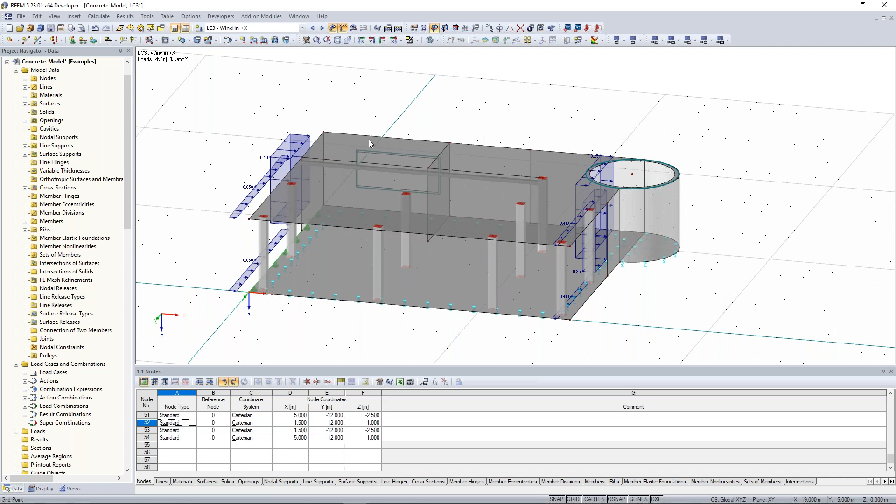Now I jump to the next load case, the positive Y direction. I select all three surfaces here, click on new surface load, relate to the projected area. For the pressure side we have a value of 0.4 kilonewton per square meter. Now I refer to these lines, new line load, and also here 0.65 kilonewton per meter.

Now I made a mistake, the direction of the wind load is wrong. I click again on these two line loads, right click, edit line load, and the direction was indeed wrong. I refer to true line length in the Y direction, and now it's right. So it's no problem when you make mistakes in modeling or load entering - you can change it every time afterwards.

Now I want to show you something: you can add everything also with the help of the data navigator or with the help of the tables. The same thing, adding these line loads, I want to do now with the help of the tables.

Go to the area loads here in the tables, it's the third section here. Jump to the tab of line loads, and there you see for load case 4 we already have these line loads. The big advantage of this is that you have a really good overview of your existing line loads and some additional information.

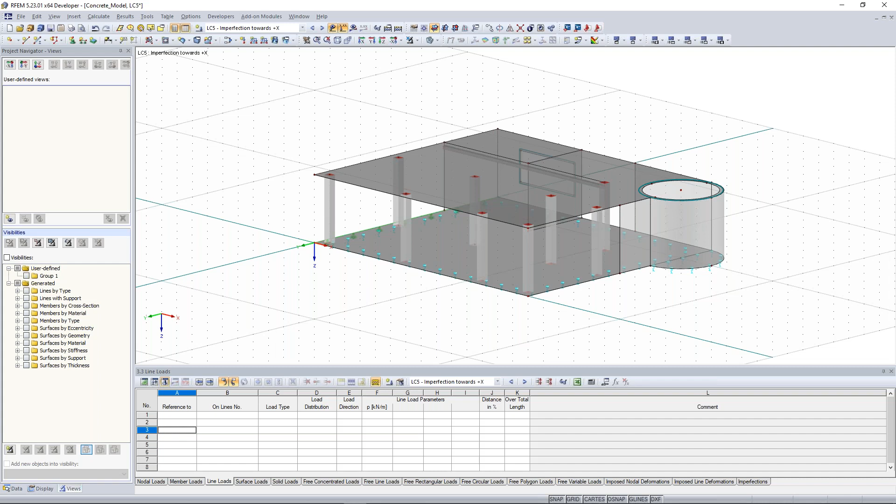Go there, visibilities, activate here members by cross-section, and activate just the rectangle 350-350. Now you see everything is selected, or everything is shown by this visibility of these rectangles. Now you can easily select these columns.

When I select these columns, I can go to Insert in the menu bar, then Loads, and at the bottom find Imperfections, and select graphically. Since we selected all these columns, all these members, you find it here in this box too. I refer to my members, Eurocode 2, my precamber is 0, and my inclination is 1/200. I refer to my local axis in Z direction. You have to trust me that the local axis is set correctly. Click OK.

You can activate the local axis of members by right-clicking on one of the members and selecting local axis. Now you also see the imperfection. I changed the visibility, the display mode, to wireframe, and now you see the imperfections a little bit better.

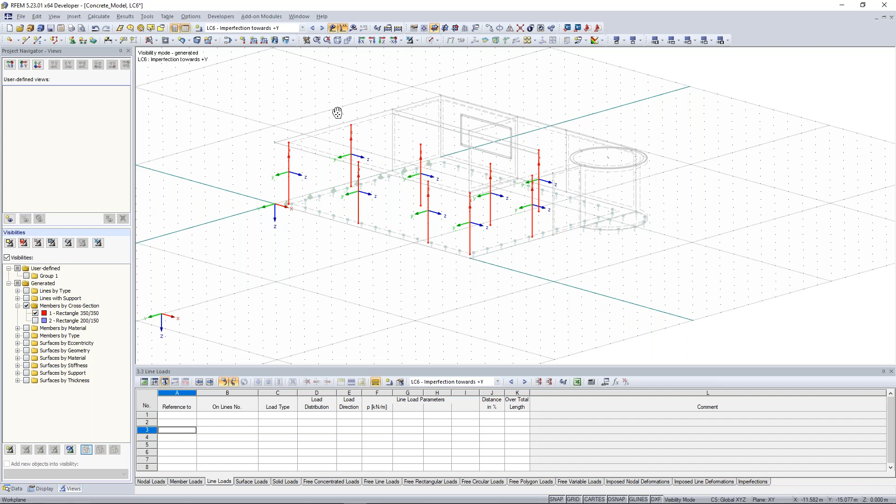Okay, good. We do the same thing for load case 6, the imperfection in Y. Again we select everything, click on Insert, Loads, Imperfections graphically, but in that case the direction should be the Y direction.

Click OK, and we have this imperfection here. Okay good. Now almost everything is done. Let's refer a little bit to the FE mesh. In order to set some FE meshes, as we learned in the first online training, we have in the menu bar the possibility to do some FE mesh settings. Click on that.

Here we see the general target length of finite elements. It's okay to use 0.5 meters. You have to adapt this length of finite elements every time to your whole model. When modeling or designing joints with the help of RFEM and FE elements, you have to adapt the target length of finite elements and choose maybe a lower value, so a finer mesh. It's up to you how to use that. I can really recommend leaving it like this, because the presettings are really good. Click OK.

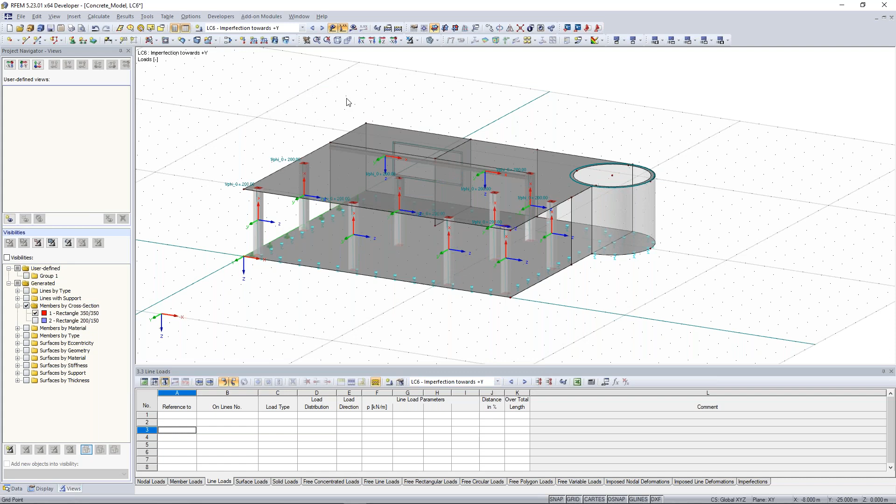Now I want to create an FE mesh refinement at this node, because sometimes the FE mesh should be modified in specific parts of the model. Those are critical areas such as corners of openings.

For example here, we have corners of openings, or also areas with single loads, because there can be singularities. You want to avoid singularities as much as possible, because singularities are parts of a structure where you don't get good results.

For example, we make here an FE mesh refinement. Click on that node, right click, FE mesh refinement, click New. Create a new FE mesh refinement and apply it to a node, circular. The radius should be 1.5 meters, and the inner and outer length of this FE mesh refinement should be 0.1 meter and 0.5 meter. Click OK, click OK again. Now you see this sphere, or these circle lines.

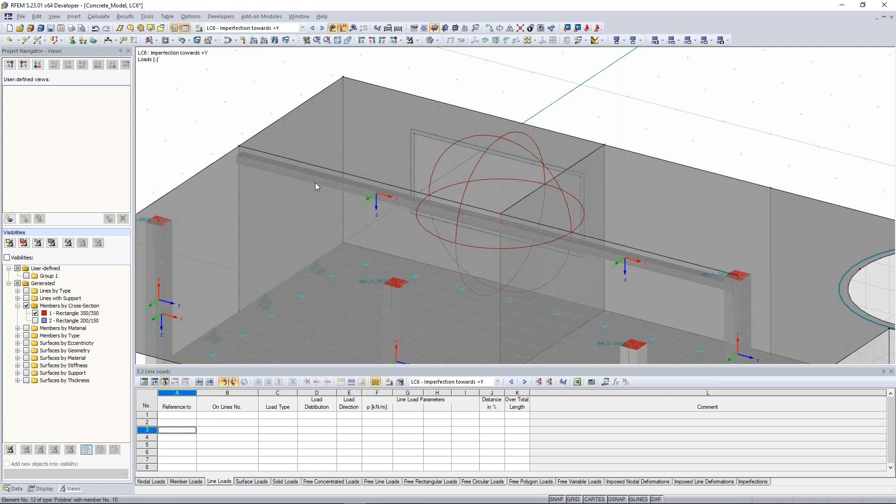Now let's show the FE mesh: go to Calculate, click Generate FE Mesh. To see it a little better, click on wireframe. You see here the FE mesh generation. The normal target FE length is 0.5 meter, which we set in the general FE mesh settings.

When we use the FE mesh refinement, you see here that we made an FE mesh refinement, where the inner length is 0.1 meter and it becomes bigger and bigger up to 0.5. It's up to you how to do that. For example, I learned that you need at least 4 FE elements in order to get good results at this surface.

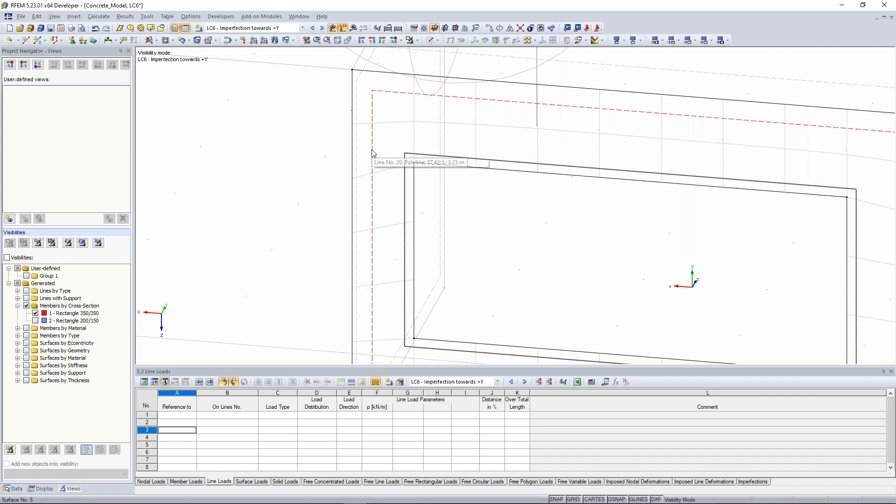So when you want to interpret some internal forces or results, I don't know if 2 FE elements are enough to get good results. It's up to you. Again, here at the corners you will probably get singularities, because here you have just one FE element, and along one FE element the results are calculated. I don't know if you get good results there, so my recommendation would be to do some FE mesh refinements.

Okay good, so I cancel the visibility mode. Now everything is considered in my opinion, and I can calculate the whole structure now. I go to Calculate, and I choose the result combination, which is much faster than calculating every single load case and load combination. Click OK, and the whole structure calculates.

Okay, now let's show the results. I jump to the result combination, click here on show results. The first thing we see is the deformation. I think the deformation looks really nice, interesting.

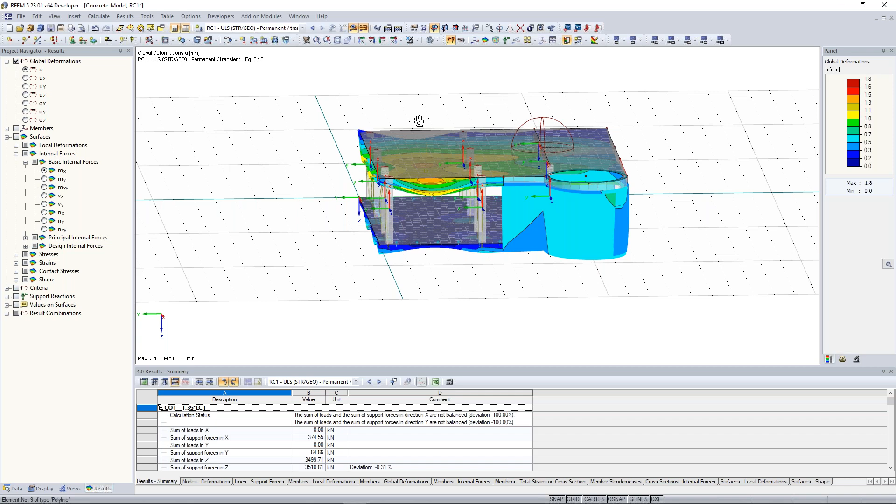You have the possibility to see the deformation of the surfaces and also of the columns. You see here this line deformation of these columns, of this member. Go to the display navigator, activate deformation results, deformation cross-section colored, and you see here also the deformation of the cross-sections.

Okay, good. Next thing, members, the internal forces. Let's go to the downstand beam and compare the results. These results look very good. So we have here field moments, also this negative moment above over this wall. By the plausibility check, I think this is okay.

Again, to the normal forces of the columns. Normal forces are pretty clear. Okay, good. So now let's go to the surface forces.

Surface internal forces, there we have this mx and my. What does it mean? When I deactivate the local axis of the members and activate the local axis of the surface, you see following: you have here the y direction and here the x direction. When I show the mx, basic internal forces, it is along the local x direction of this surface. I think that's pretty clear.

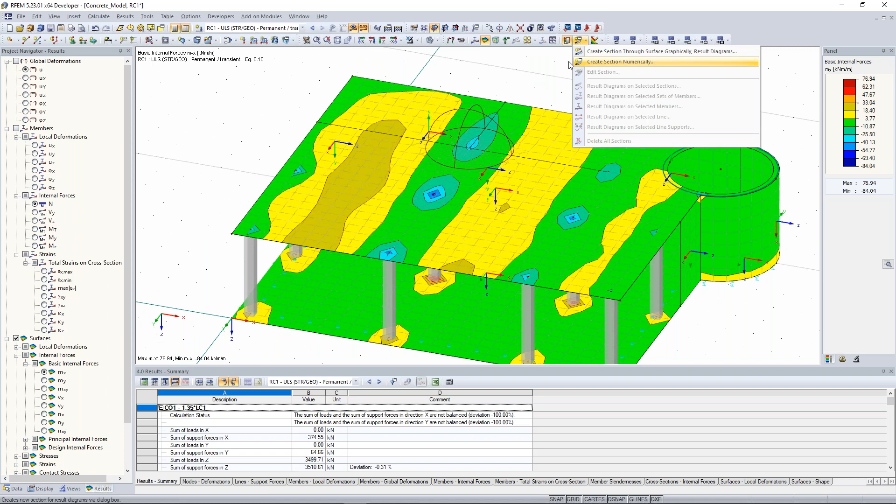You can make a section. Go here, new section numerical, or create section through surface graphically. You can do that and then watch these results. I'll make it - I create this section at the data navigator, scroll down to sections, right click, new section.

Give it a name, AA, and choose the right nodes I want to have. In that case, I refer just from one column to the other end column. The section on surface, or the projection direction, should be the global Z direction. And I refer just to that surface, not to the other surface, because the bending moments are a little bit different. Click OK.

Now this result diagram will open, but for that case it isn't so important, so I close this. When I want to look at the sections, you see here my section.

You see there was a mistake because the nodes of the section weren't right. So I edit this, set the section again right - should be this kind. Now it should be right. This will take some time. Okay, now I have the right nodes.

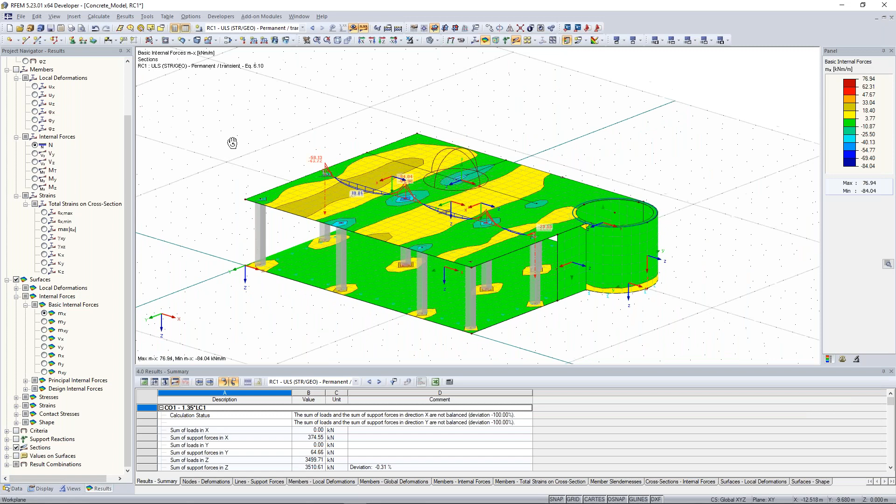And you see here the bending moment. Good. And also some other internal forces, my and so on.

Now, next thing is maybe also important, the contact stresses. Contact stresses appear at the bottom surface because there we have soil stresses. Here we have these contact stresses, and especially at the areas where the columns are, there we have very high contact stresses. I think that's pretty clear.

Also, you can show the support reactions, so you will see here at the line supports this support reaction. When you want to have this distribution of the line supports, just go to display, go to results, support reactions, and say smooth distribution. And then you see here this distribution support reaction. Good.

I think that was everything. Of course, you can show the values on the surfaces on every FE mesh, or total model of all surfaces and so on. There you have different options to do that.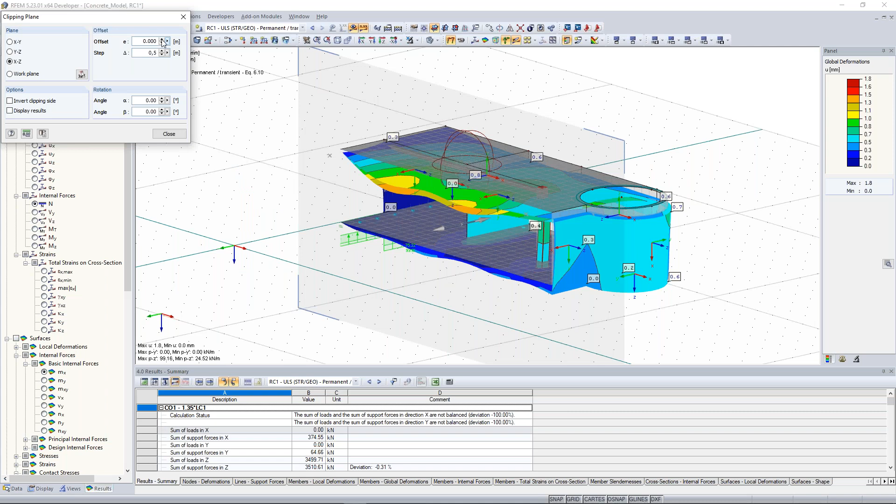Good, maybe two additional features. We have the possibility, for example, very good for the interpretation of global deformation. When I activate the global deformation, first of all the clipping tool - you can cut the plane, set a step of 0.5 for example, and then you can choose this offset, also choose the right plane, and so on. And then you see also every time the different values there. It's very helpful.

You can also rotate the angle a little bit. It's up to you how to do that.

Okay, good, this is maybe a nice feature. And one of my favorite features is when you want to impress someone, maybe your colleague next to you, and say, hey, look what I have for a nice structure, click the Shift button and the F button.

And then it will activate the flying mode. You can fly around the whole structure or the whole building. With the help of the arrow keys on your keyboard, you can fly around. With the help of your mouse, you can move your camera and fly around. And with the help of the up and down keys, you can jump to the next level. If you want to increase the speed of this flying mode, just click on the plus and minus keys on the keyboard and it becomes faster.

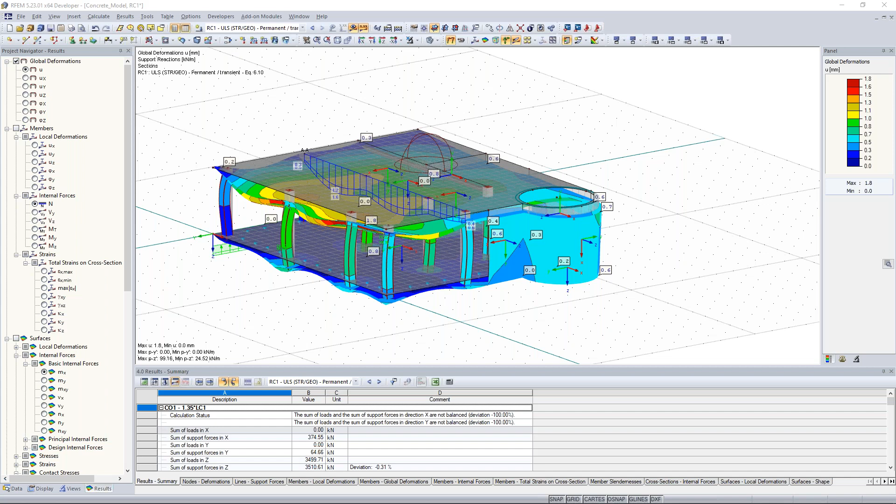Okay, could you show how to set a local coordinate system? Could you read it again? Could you show how to set a local coordinate system? Of course, that's no problem.

In order to set a local coordinate system, you can right click to open the context menu, and go to coordinate system. There you have the possibility to create a new user-defined coordinate system. And when I want to refer, maybe I say now to that level here, from there, now from another level, from that level here, okay?

I can say, okay, look to these points here, U, V, W, and I can say my first node, so my origin point, should be this node here.

My u-axis, you see it here, should be this node. And my other node should be this one. So I created this plane here. Click on OK.

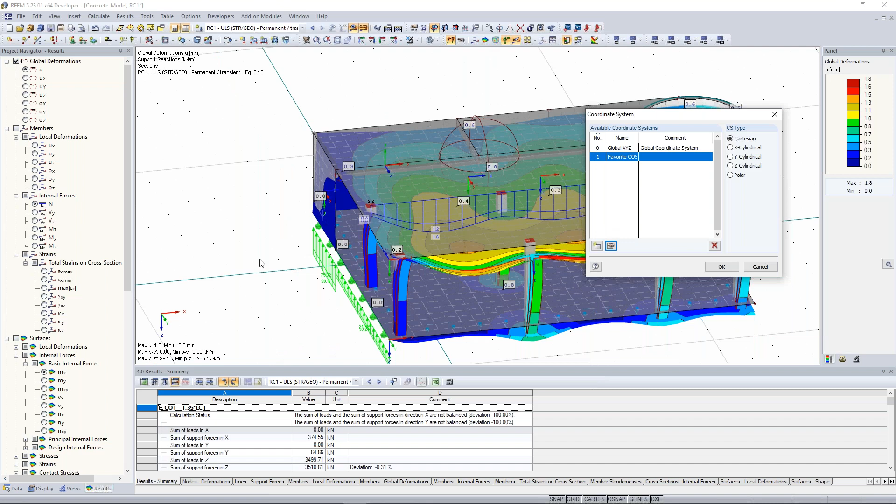Now you can enter a name, let's say favorite coordinate system. Click on OK. And now you see here this user-defined coordinate system. Maybe I deactivate the other coordinates. Okay, this is the way how you can create a new user-defined coordinate system.

Okay, next question please. Is there an add-on to RFEM to design and calculate different ground types? What are ground types? I don't quite understand the question either. Which time? 11:24. Okay, wait a moment. Different ground type.

So is there an add-on to RFEM to design and calculate different ground types? What do you mean exactly by ground type? Could you tell us this question again? During that, I would continue with other questions.

Okay, another question is, what do you mean by imperfection in load cases? So we have the load case imperfection, and just the load case imperfection wouldn't cause any internal forces. But in combination with some other loads, the imperfection would cause additional internal forces. So you have to consider these imperfections every time in load combinations.

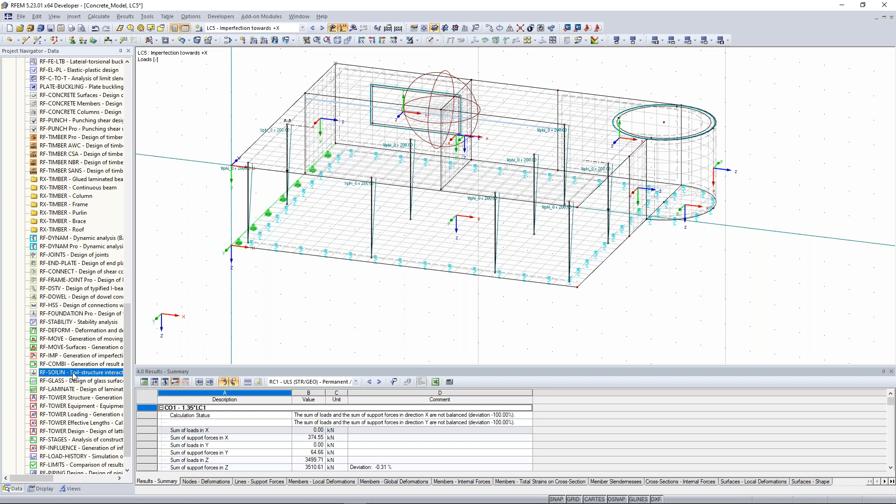There are, in my opinion, different calculation methods concerning the right ground analysis, the right bottom. Consider the ground as a philosophy topic for itself - there are different ways to do that, different methods, different ways to consider it.

Good, next question. While discussing the result options in the internal forces, you said mx is mentioned with respect to local axis, but in the model we have the x-axis oriented differently with respect to different surfaces. How to interpret this result?

Okay, wait a moment, I go back to my work plane. So you have to distinguish between the local axis of this member and the global coordinate system, and the results of these members refer every time to the local axis of the surface.

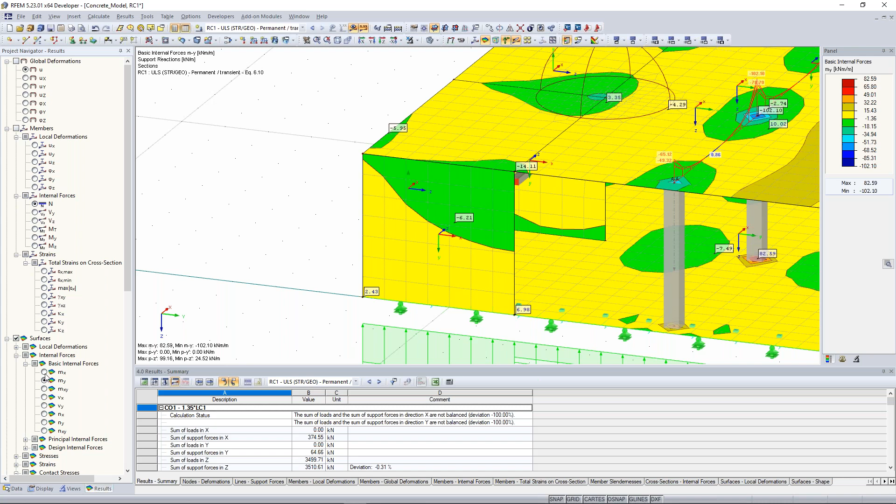So when we look at one of the walls here, mx and my - I think it's pretty clear that we don't have so much bending moments there. But when you look at ny, there we have some normal forces in that wall. So please keep that in mind: these basic internal forces mx and my refer every time to the local axis of the surface.

Okay, next question. How do you consider eccentricity of loads, for example, in column members? That's a very good question, a really, really good question.

I have to think about it because I believe that's possible - we implemented this function, but I have to look up how to create this. Praxitelis, could you look for it? I can look it up and send the link. That would be fine. Now I think I have it.

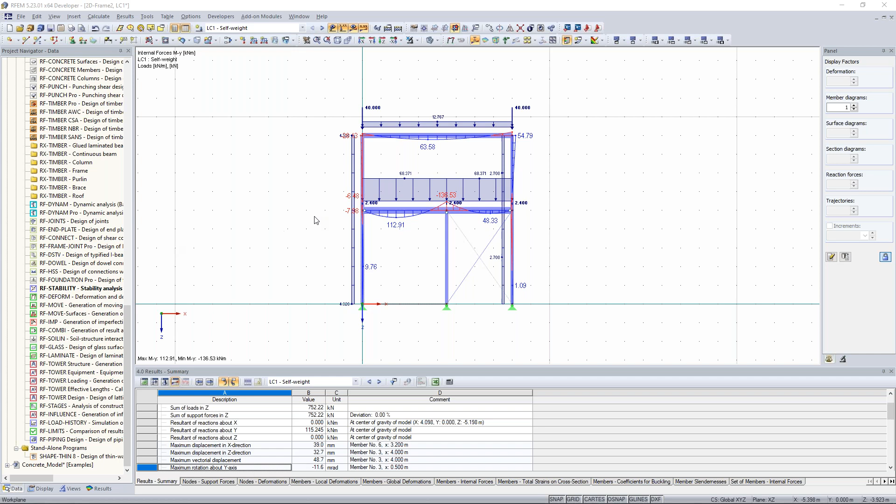Yeah, you have the possibility to create different cross sections, of course. When I go here, and when you want to create this cross section, use this cross section library - there you will find a lot of cross sections, also some trapezoidal cross section, like this one here, trapezoidal hollow section. This is possible.

Now I think I understand what you mean. Yes, of course this is possible - a trapezoidal hollow section, in order to have this as a downstand beam. So you want to create maybe a composite structure. Yes, this is possible. You find it here in the cross-section library: trapezoidal cross-section, hollow rib section, or also here, trapezoidal hollow section. Yes, that is possible.

Next question: are you going to consider the issue of punching shear between the column and the slab surface? Yes, of course, you have to consider these things. You can see the values here.

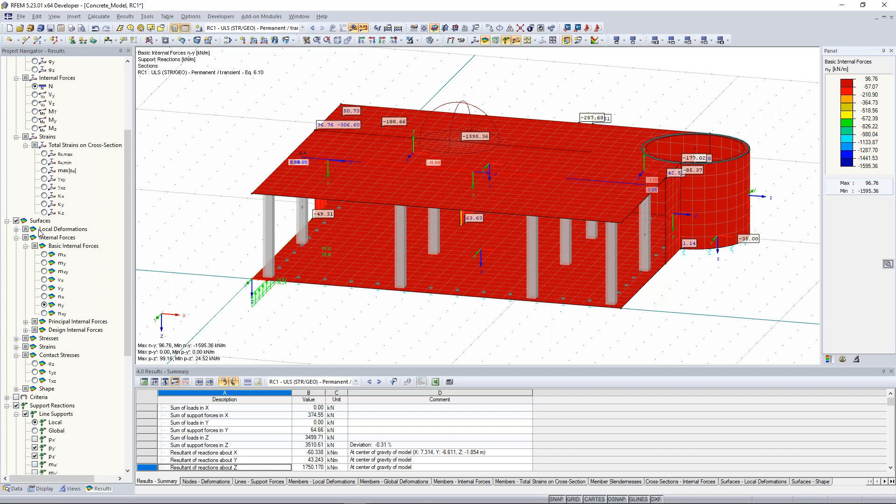So when I look at the results, go to the basic internal forces - I think that's pretty clear. When you want to design this considering punching shear, you can use one of our add-on modules, RF Punch Pro. There you consider the punching shear design of surfaces and the forces within these columns, design internal forces. But you have to activate and use this RF Punch Pro add-on.

Good, next question: if you could show some options related to documentation of results. Yes, of course, but this will take a little bit longer.

So when I want to transfer some results or information about the whole structure, you can create a printout report. Click here on print graphic, use this mass print - very helpful for creating several documents and pictures. Click here on mass print settings. First of all, create a mass print of your model, isometric view.

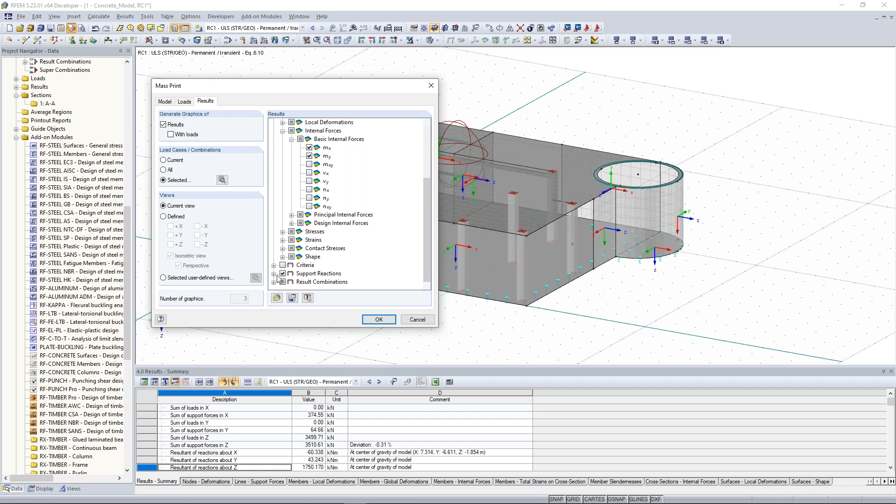Now I have to choose the results I want to show. In this case I'm interested in the global deformation, basic internal forces, maybe the support reactions, and also the contact stresses at the bottom plate. I refer to my current view, click OK, again OK, then OK, and the printout report will be opened.

Now I have on the left side this printout report navigator, a big overview of the model information, and here the generated model. When you don't like this picture or image, just right-click, say edit, and change that. In that case, I don't want to see the FE mesh refinement, so I deactivate it, and also deactivate the FE mesh. Then I can say okay, go back.

And now you have it here like that. When you go to the chapter of loads, you see here the different images of the loading and their load cases. Takes some time - very helpful. Here again the wind and also the different results we created.

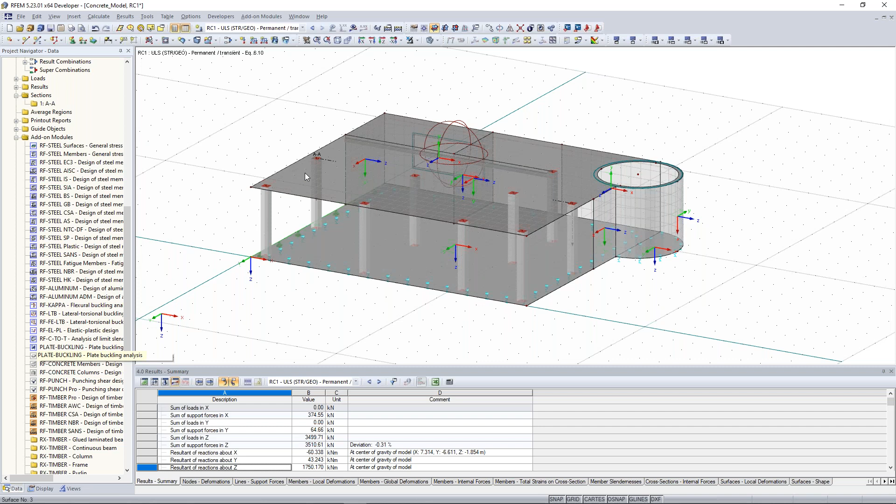For surfaces, please use RF Concrete Surfaces. For members, please use Concrete Members and also Concrete Columns. Normally RF Stability should consider these cross-section properties, especially the stiffness, also of the reinforced column for example. This should be normally possible. But in my opinion, I don't think it makes such a big difference when you have a slightly stiffer structure.

But when you want to consider concrete design or reinforcements, you have to use one of our add-on modules. So click here on RF Concrete Surfaces or Concrete Members in order to design these members, to consider reinforcements in the column for example. Then you can do again an RF Stability analysis to get your critical load factors, to see where are the critical points of your whole structure.

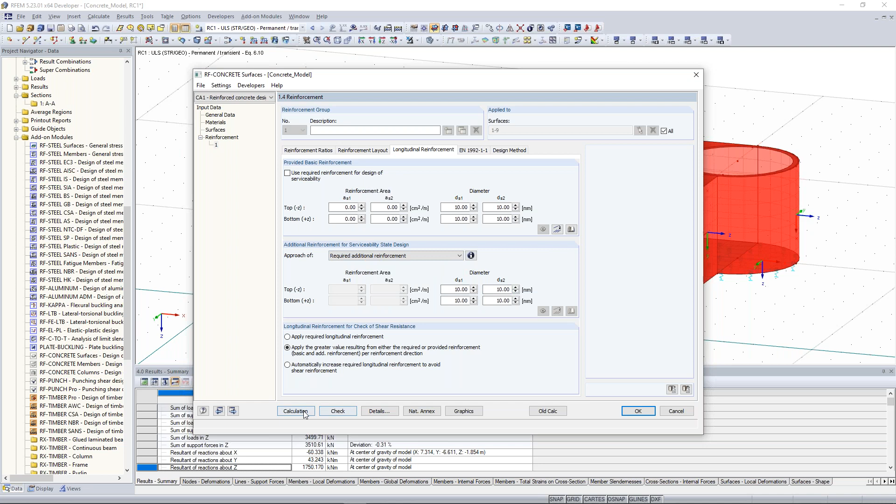Also, you can use the diameter and so many other things. And then you can calculate it, and you will see the different results. I don't know if it's right, but you see it calculates a long time, so I cancel this.

But here you can preset everything. For that, I would recommend you look at our webinars concerning concrete design. We also offer some online trainings concerning concrete design.

So, I think that is everything for now. Or is there any question? No, just one last one: are we planning other webinars like this for other products of Dlubal, like RSTAB or some special design tools?

Yes, we offer other free webinars. Me and Praxitelis are especially responsible for the basics of RFEM and RSTAB. I can do some steel design, that's possible. I can also do some concrete design, but for that we have other employees who are specialists in those areas, so I would recommend you look at our online trainings and webinars.